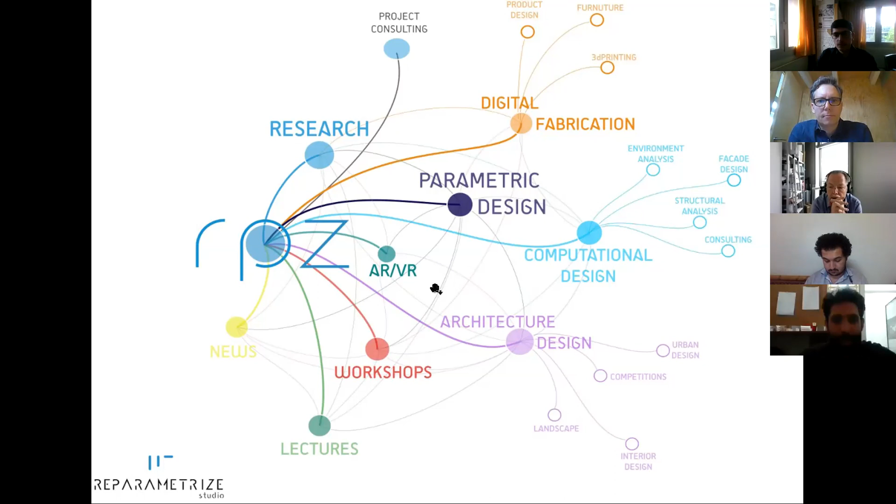One of the highlights of 2019 was, of course, the Eyes of the City Shenzhen Biennale, invited by Carlo Ratti Associati, which showcased 2 years' worth of research and development on the post-war smart city redevelopment of Damascus, Syria. We brought the past, present, and future of this city right in front of our Chinese audience through sophisticated 360-degree projection mapping. Our core competence lies in the field of artificial intelligence and smart city.

Recently featured in ArchDaily, we are one of the first companies to apply 3D scanning and AI-driven data analytic methodology for post-war smart city redevelopment of Damascus, Syria. Our vision goes beyond the redevelopment of the city of Damascus, and we are looking to be the next leader in post-disaster urban development, offering a proprietary state-of-the-art technological solution for a smarter and more connected city.

So again, Echo of Children is a joint research and summer online course. The research aims to teach thinking strategy for dealing with the post-war phase by focusing on children and developing building materials from destruction using digital design techniques.

Find the link between the effect on children's behavior and remaining resources, in order to develop and exchange experience information to reach an interactive, productive outcome.

The course had 5 phases. Phase 1 was the research phase, data collection. Phase 2 was material system and project development, then location and strategy, design processes, and finally the fabrication processes.

We invited a lot of guest lecturers on different topics, each linking to the research phase we had. In the end, we had Patrick Schumacher as the final guest, talking about the role of parametricism. Most of you were there in the lecture.

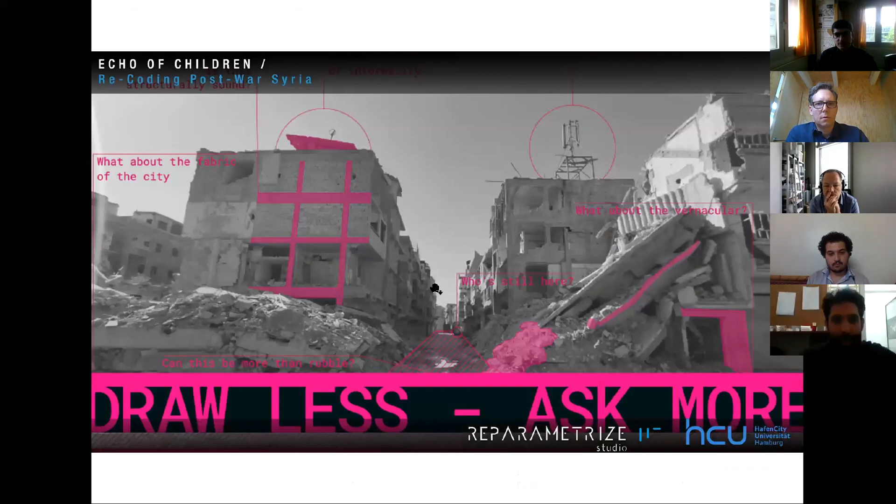In this course, we focused on rethinking the methodology of temporary architectural practice in the environment, aiming to find connections between war-affected behavior of children, remaining resources, and temporary projects, in order to form a pilot project as a one-to-one prototype, developing student knowledge about reusing materials as an essential means for change in the affected area, through developed samples of recycled material produced from war waste rubble.

The course is an integrated work program from gathering information, researching and studying, to manufacturing and creating new material out of rubble, developing a new methodology of recycling war material, and implementing this new material in the process of rehabilitation and the fabrication of new prototypes.

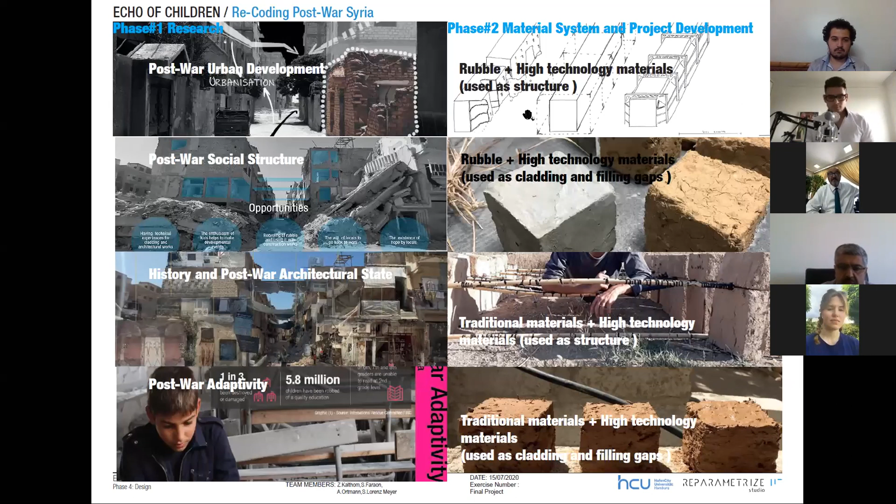So now we reach the design phase. We chose a location which is very important, in an area in suburban Damascus called the Zabadani Valley. It's a popular area in Syria where a lot of families used to have their vacations, a popular place to go.

We also chose the site, called Zabadani Festival Land. It was before the war, and we will let you know how it was before. This is a quick review of Zabadani.

It's part of a region containing many villages in Syria. The weather is Mediterranean, with rainfall in very good percentages in the winter, and it's located in a south basin, which makes it a kind of cold area.

This is a field study about our location, since this land is located in the central part of Al-Zabadani. Before the war, it was specified for festivals, parties, concerts, temporary exhibitions, and centers. The site contains many activities, which is now in a very bad condition, as you can see in the pictures we took during our field study.

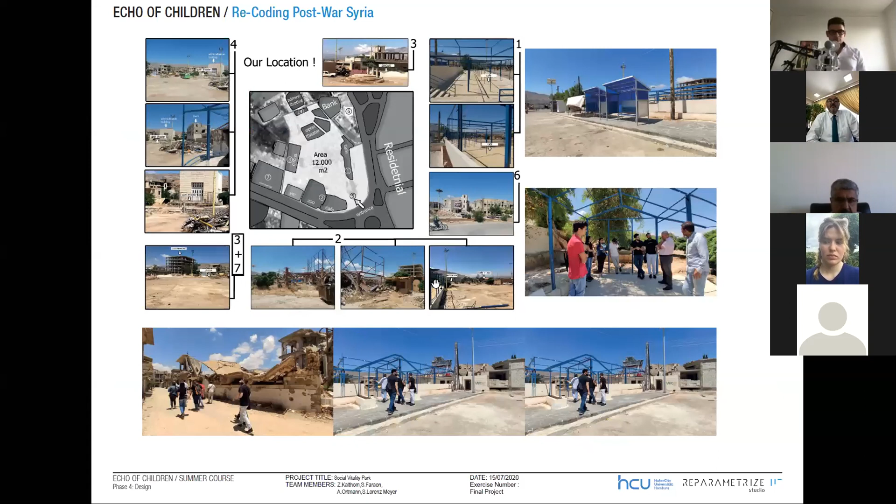The area of the land is 12,000 square meters, located from the main street to Damascus, with a main sub-street here too. Before the war, it had many activities such as an open-air theater, a festival place which is now empty, an amenities place, and a market and cafe built recently by the UN but destroyed during the war. The surrounding area is residential, with a government building, a bank, and a commercial area nearby; the rest is residential.

Some basic sun and wind analysis for the land. Based on this study, we found 4 ways of thinking, but within one system to serve this area. We want to give a new product for the residents, placing them in a good modular grid so we can take the most of the sun and wind. So we chose a 45-degree grid.

Each group now will explain about their own idea of prototyping, but this is how we are seeing our prototypes on the site, and this is how we make our main entrances.

Since here we have this structure that I talked about, which is in a bad condition, but it's also the way of entrance from the main street, so we make it as a main access for us, and also the main entrance we just keep it as it is.

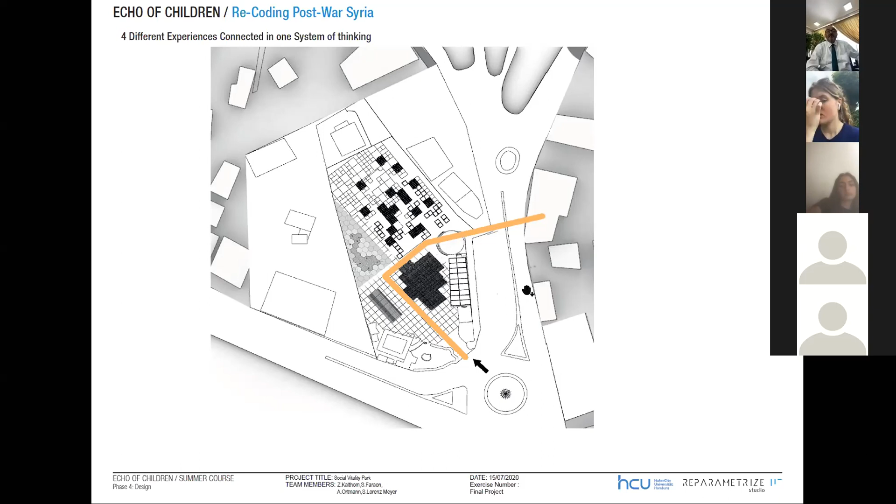We have 4 different prototypes, 4 different ways of thinking, but unified in one system, which is giving a new experience for the inhabitants of this area, and make them invest and socialize and play, and give them new functions. Each group will explain about it separately.

So we have our project, which is Social Vitality Park. We have the Inside Out project, we have the processual scaffolding system, and we have the concrete system. These are the visual connections between them.

Starting with our social vitality park, our approach, we will be taking this area, since we are focusing on social interaction, and also workshops for women and children, and also places for a farming approach, since this area was also famous for farming vegetables and fruit.

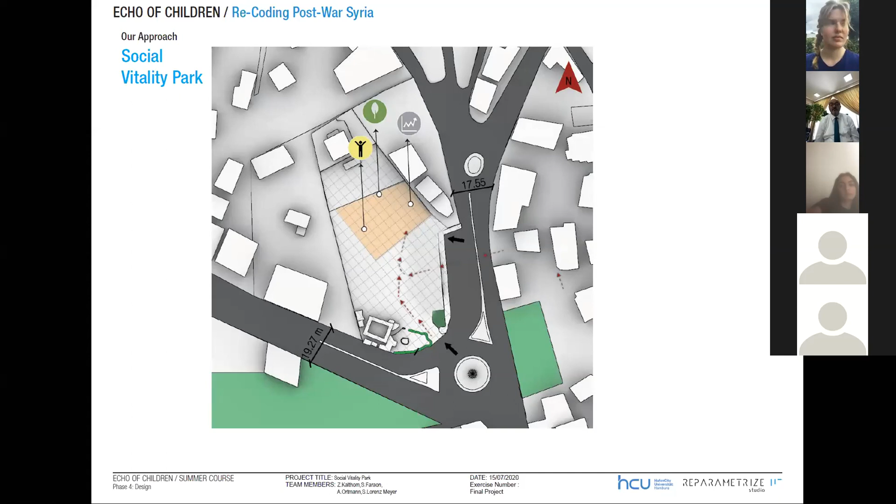Okay, so we'll just go with you a little bit about our research about the social structure in a post-war in general, and then we will go to specifying our project. So Zaina, please go ahead with this one.

Zaina, is she here? Yes, I'm here. Okay.

Our vision was reimagining the destructed building as solid endpoints, and generating new ideas and functions to fill them regarding material usage, and empower the awareness of responsibility. We wanted to focus on the creation of common areas for people to get together and use local material, respecting the cultural identity through the continuity of local and traditional solutions.

For the social aspect, post-war community, we started by studying the Syrian family structure post-war. What happened was that women are now the decision makers in almost 1 in 3 households, and the children are displaced from their school. That's why we found that we need to help people help themselves, especially women, and combine the effort, because combined effort leads to better results.

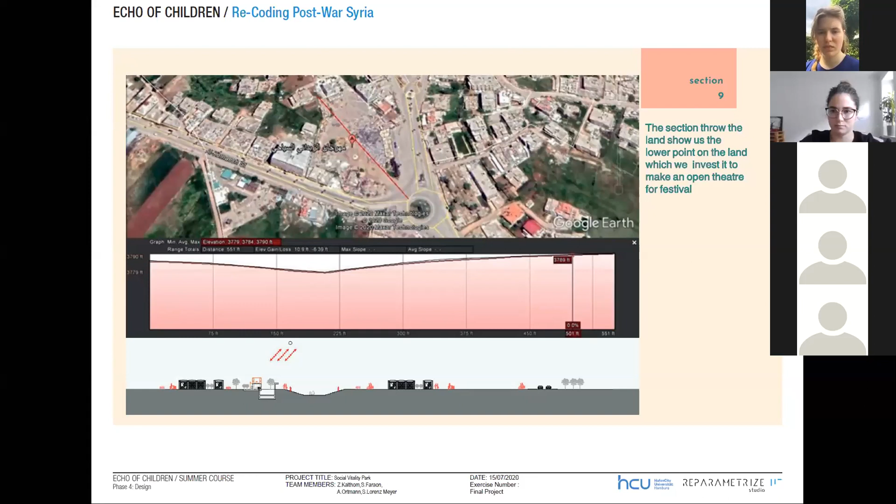Okay, so we will be now moving to the next explanation of our experiments on the material. We studied materials made out of rubble. We went to a destructed place in Damascus and collected the rubble, added cement, and also added different sizes of rubble. And we added a new high quality material, perlite, which also provides thermal insulation and gives new alternatives for the material we are developing.

So we went through many experiments, and Sophie and Annie in Germany tried to make their bricks, but without the perlite. Here we are trying it with the perlite.

So now, explaining the structural approach of it all.

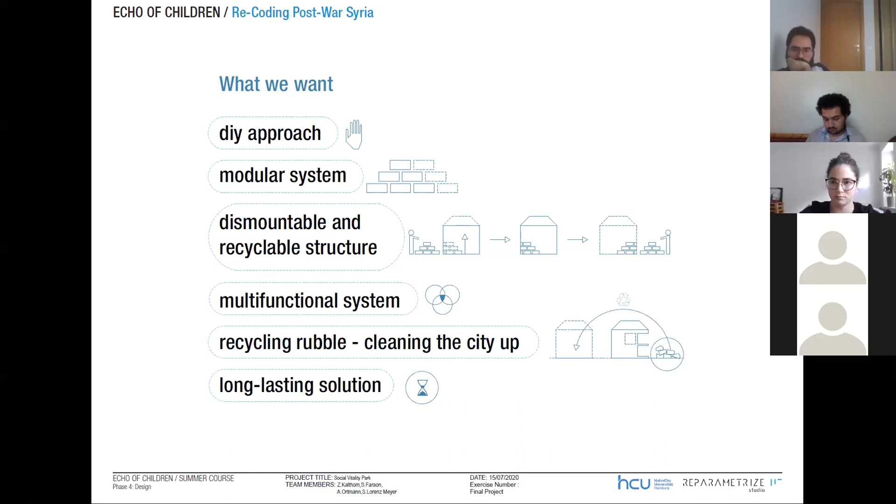So what we came up with: first we developed a system that would mostly work on buildings that were still partially there, where there were still floors we could attach new columns to. Later we further developed our system so that it could also be built into completely new structures.

Our system consists of interlocking bricks, as you can see here at the top, we have some further 3D images later. They're made of rubble, as Anna said, and also cement, so they don't need to be burned, and perlite, which we mostly use as insulation within the bricks.

It might sound strange for someone from Germany that we plan a building without a proper insulation layer, but in Syria it's actually pretty common. Later, insulation could be added either on the inside or the outside of the structure, so there's room for that.

Our bricks are not just interlocking, but also get pre-stressed with steel rods that are tied through them at all four corners with nuts. These columns are set up on a 4x4 grid, which we'll get into more later. Within this grid, there are fields created in the middle, and these fields can then be filled with different types of facades.

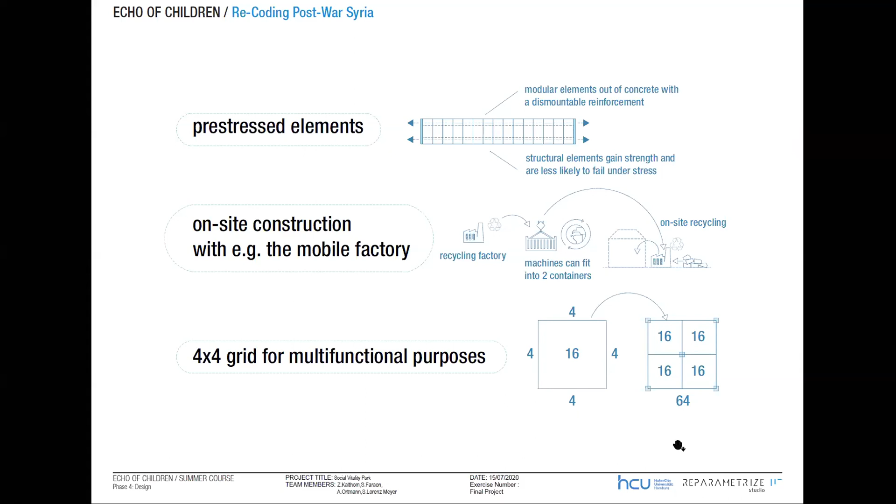We had the idea from a company called the Mobile Factory, which had the same idea. They put the machinery of their recycling factory into two shipping containers, so they can be shipped around the world and used on site. It's a Dutch company, and they used it for destroyed homes in Haiti. We thought we could use the same approach, where you get the factory right to Syria and do the on-site recycling process.

The 4x4 grid we came up with creates a room of 16 square meters, which could be used as a good room for sleeping or meeting. Even combining 4 of these 16 square meter units, you can use it as a good common room with just one column in the middle. So that's just the general approach.

As we see here, we made a little section with columns on each side, and then the facade element, which can have great variety. We thought of either a completely closed facade, or putting windows in, or maybe small gaps. Above the columns we have the beams on the left and right, and then a vaulted roof, which we'll see more of on the next page. Below the vaulted roof, there's a little gap created there.

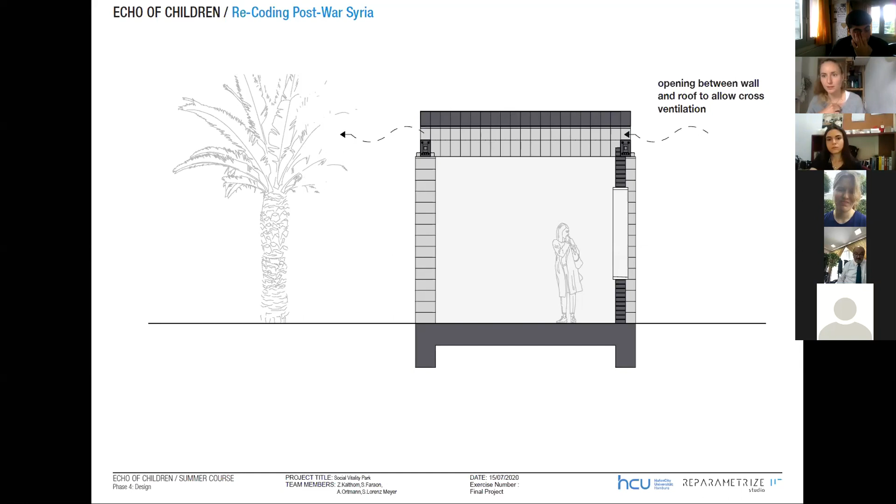The basis of our whole structure are these bricks I talked about earlier. The interlocking bricks are 40 by 40 by 20 centimeters, with an interlocking part in the middle and also a hole, which makes them not quite as heavy. They interlock better, and for structural purposes it's good if the weight is on the outside and not so much on the inside. There's nothing we need in there, so we thought it'd be good to leave it hollow. Then you see the four steel rods, which are pre-stressed and work as a connection.

These bricks are made into columns, as we see on the bottom. On top, we have concrete plates which we use to hold the beams in place. The beams are also made from interlocking bricks and also pre-stressed. On top of the first layer of beams, we need a second layer of beams.

On top of that, there's a vaulted ceiling. The ceiling also consists of very small pods, because we wanted not just the columns and beams to be dismountable and light and easy to handle without requiring big machinery, but we wanted the same thing for the ceiling as well. That's why we have very small little roof pods.

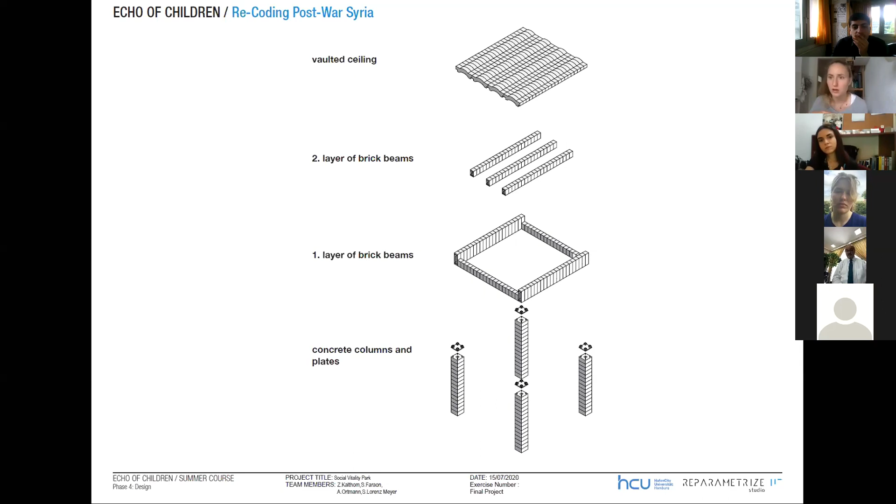We stuck to only one story. Potentially a second could be added, but we weren't able to do a lot of testing, so we decided it would be better to stick to a one-story building. Then these 4x4 structures are created, which can be put together to create larger structures, not just in a square but also various shapes.

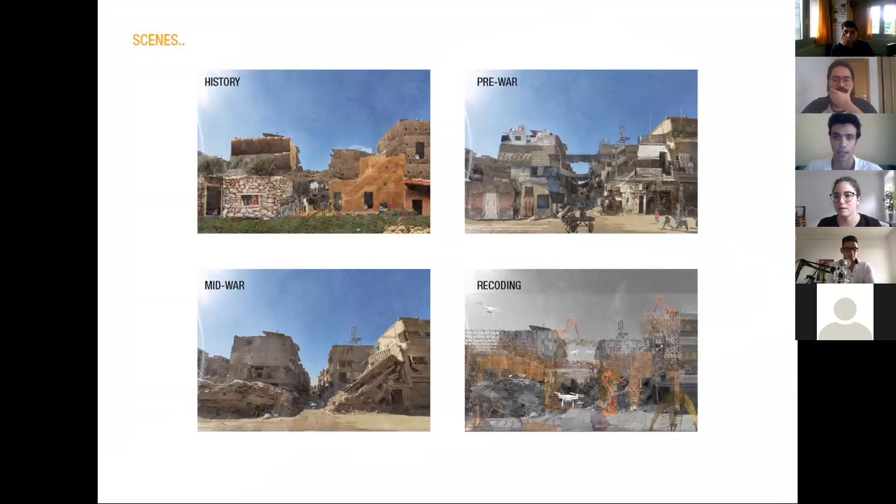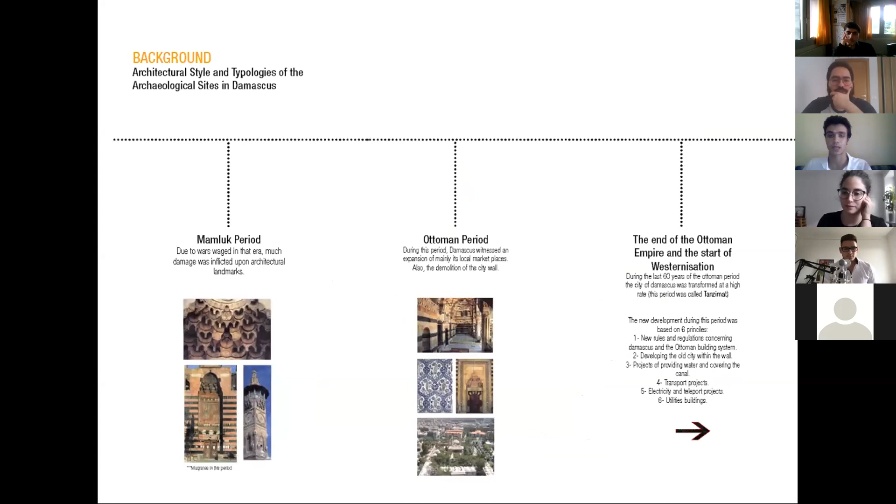So at the beginning, as we all know, Damascus is an old inhabited city. To do this, we've done research under two folds. The first fold is the history of Damascus itself, and the other was the history and timeline of Syria, passing through so many periods, according to the lectures that we've received on the history of Syria in this field by Dr. Mufaq Zghama.

At the end, because of the need for residential units in Damascus, our project aimed to cover the needs of residential units, as well as to cover any architectural space this community needs. So we studied the evolution of Syrian houses, starting from the tent, ending up to the modern villas we had in the 40s and 60s, which all morphed according to human needs. This project is supposed to morph to cover human needs as well.

With regard to the continuing precarious situation of Syria - in 2018, about 1.4 million returnees, and in 2019 another 250,000 could be recorded. Here one encounters extreme circumstances such as extensive destruction distributed throughout the country, as well as post-war conditions like lack of housing, infrastructure, and supply.

Based on research conducted by the UN, we have listed the most important elements for our analysis here. Firstly, the way in which the destruction is classified, and a tabular summary of the number of destroyed buildings in the significant areas of Syria.

The focus here is on Al-Zabadani, with the amount of 3,364 cases, where also the approach for the project takes place. Here is a detailed summary in the form of agglomerations and agglomeration points of the affected buildings in Al-Zabadani.

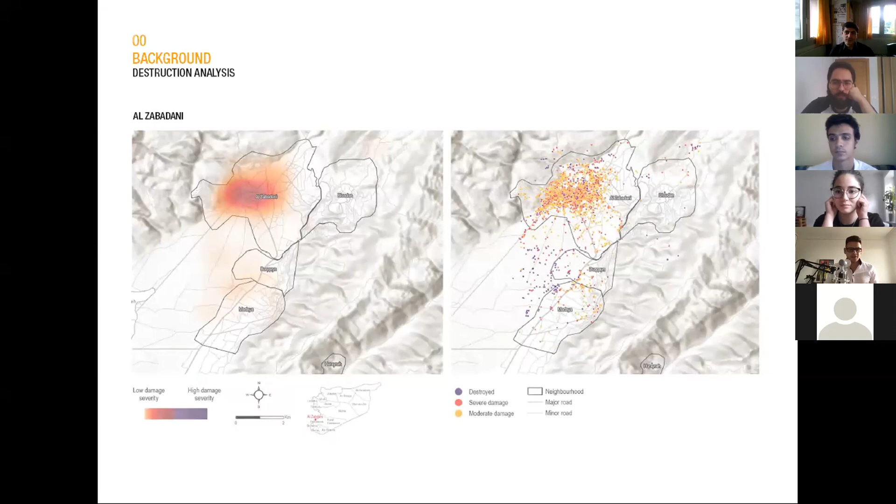For orientation, we used the UN classification of respective destruction. This heat map helped us understand and analyze the current situation of the site. More exactly, we have here the exact allocation of affected buildings in the rural region of Damascus, listed as destroyed, severe damage, and moderate damage.

Again, the focus on Al-Zabadani with 659 destroyed, 1,251 severely damaged, and 1,454 moderately damaged buildings. Now for the research context, we studied the conventional construction system that begins with picking the raw material and bringing it to the factory.

The material is then transported to the construction area. But our proposal is simpler: we only need to transport the raw material to the construction area and assemble it in the same place. To achieve this vision, we need to know what, why, how, and when.

The raw material we chose is the reed, also called Arundo donax in Latin. This material is a medium-sized bamboo with thin-walled columns up to 9 meters high with long internodes. The origin of this reed is native to the Old World, from the Iberian Peninsula, used for medicine, horticultural, and cultural purposes. Reed grows abundantly in rivers, lakes, and humid places.

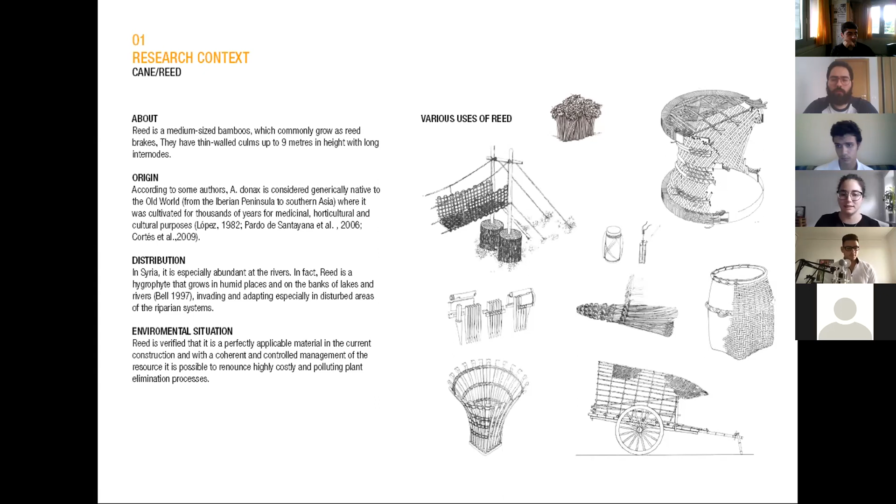This material is very popular in Syria and all around, familiar to the population. It actually gives them an identity, and is used for crafts and furniture, and now for construction.

This material has a good environmental impact. The reed usually grows quickly and does not need special care to be produced. It also helps prevent soil erosion and reduces temperatures in the area. Reed is a great construction material for structures, especially in seismic areas.

Using this material will help minimize the use of natural resources such as water and wood and some others. The economic impact of reed can give us a chance to create a local industry that benefits the communities directly.

The reed, due to its growth method, is a cheap material accessible to the public. The tools we need are not expensive and can be found everywhere.

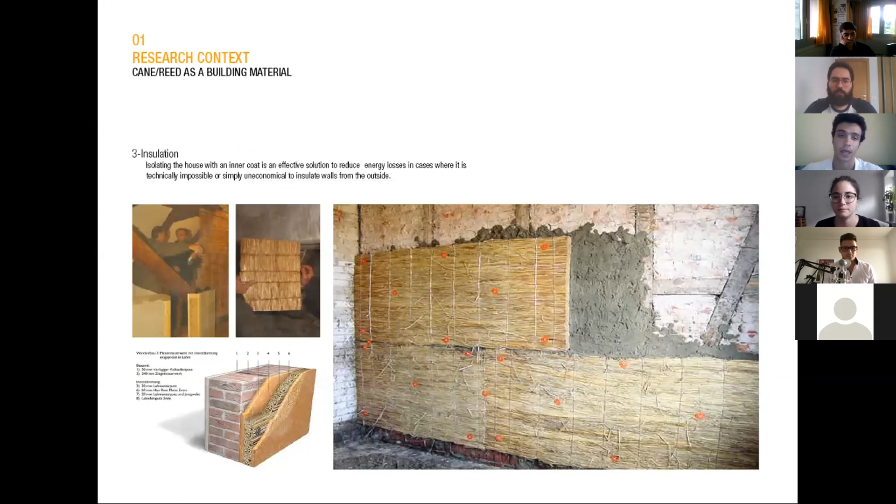Reed has many architectural uses. Here you can see it as a cover top, and in the next slide as a facade scheme. You can also see it used for isolation, because it has good insulation abilities.

On the other side, you can see it used as a building unit with other materials such as earth. In similar cultures, like in Iraq, we used to see cane-built communities in the marshes, houses and other things built out of cane.

Our approach, because of the ecology of children, is that this project aims to turn this building into an aggregation system. This system will be imagined by children as a Lego game. We will work on connecting children to their environment, to their upcoming city, and to their building process, so they can see their building as a game.

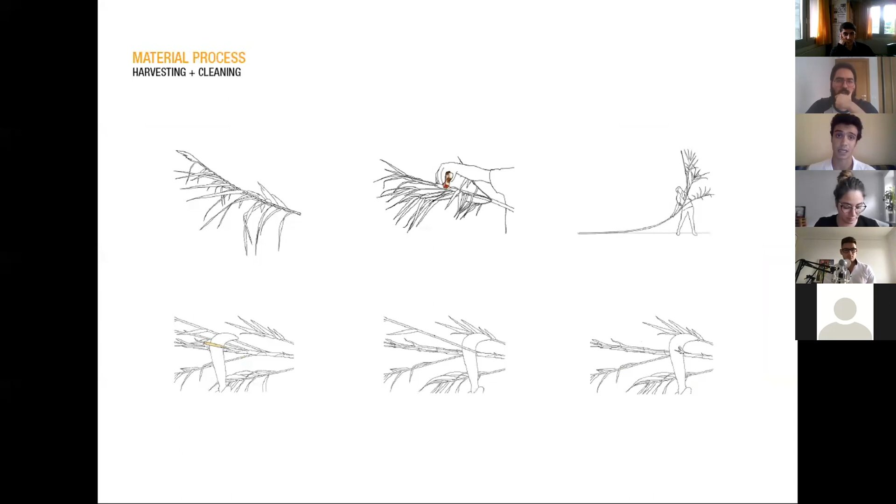The material process begins with using 2 to 3 meter cane. We start by harvesting it and cleaning it from its skin so we can build with it. Then we let it gain firmness for 24 hours, then cut it into 45 centimeters after classification. The classification is done based on diameter, length, and workability.

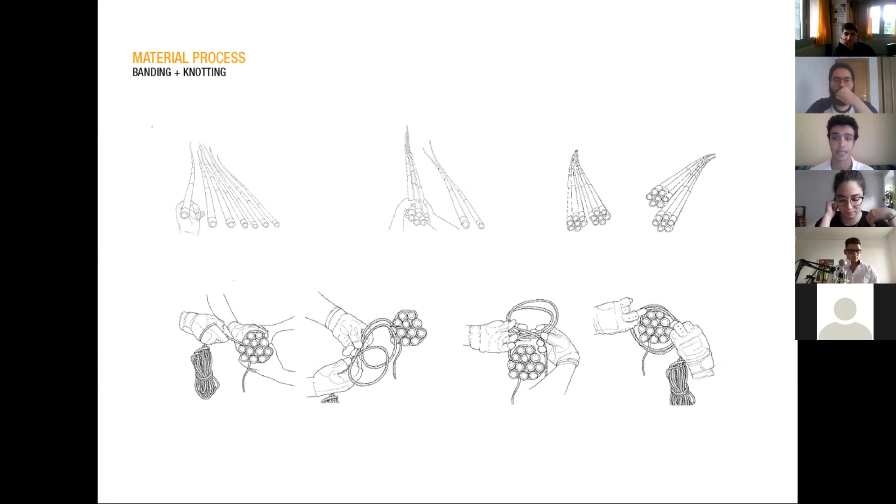Banding and knotting: after cutting it into 45 centimeters, we band 9 canes together using several techniques, which we will see in the next slides.

For the component design, as Abed mentioned, we have 9 reed elements collected together to make a building block. This building block is represented in our presentation as a cuboid, because the processing power of my computer couldn't handle more detail. This cuboid references the building block, showing the dimensions, connection points, and connection direction.

So first we explored 3 different processes for the joinery. The first method is we used the rope. In this first method, there are also 3 ways to use the rope.

The clove hitch, as we see here, we put 2 different building blocks on top of each other, perpendicular to each other, and we use the clove hitch to attach them together. Then we use the diagonal lashing, which is the same as before, but used in a diagonal axis. Then the shear lashing, we put 2 building blocks together and connect them in this way.

It's important to note that these connections also work to resist structural loads. So for instance, the last one is shear lashing, so from its name, it resists the shears of the structural loads.

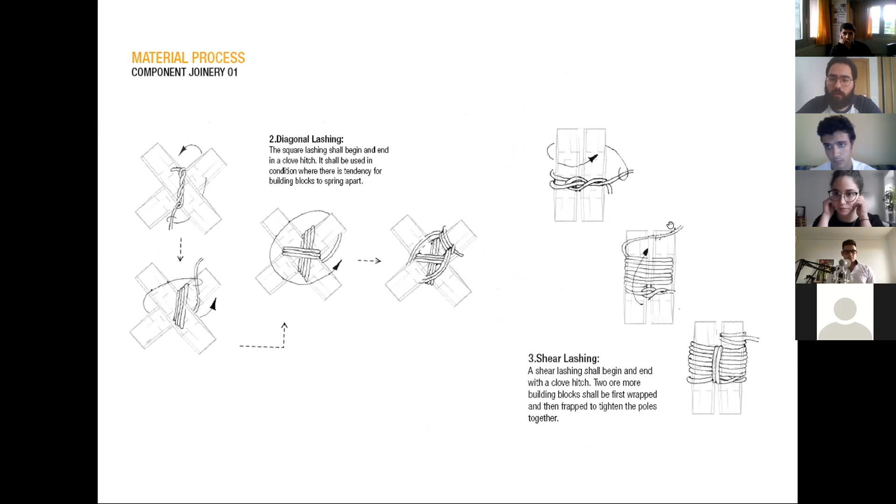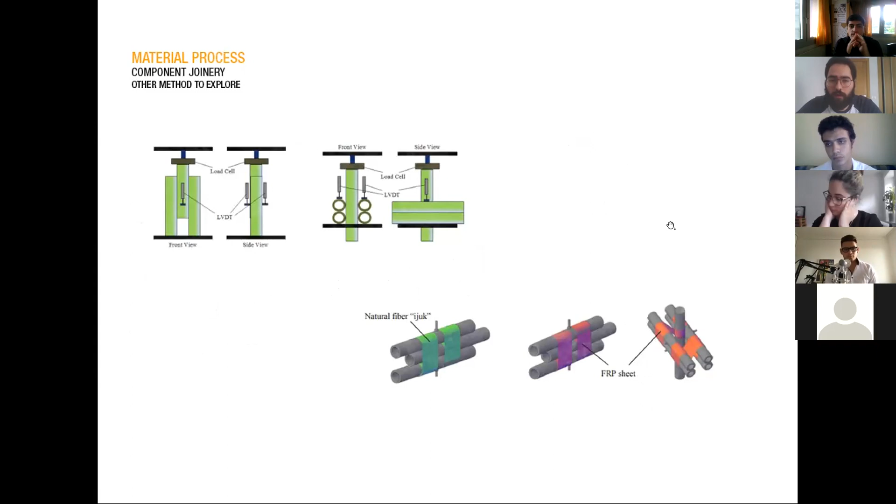For the material cost estimation, we look at the reed and the joints. We can get the reed in 2 different ways. The first is self-harvesting, which costs only labor, 4,500 Syrian pounds per labor, and each labor collects approximately 200 reeds, plus shipping because it requires a car.

For the joints, we have two different joinery systems that we studied. The first is the ropes, which cost 400 Syrian pounds per meter. Each block needs around 4 meters of rope, and labor fees will be 5,000 Syrian pounds. Each block takes approximately 4 minutes.

The other option is bolts. Each 20 centimeter bolt is around 170 Syrian pounds, and each block needs five bolts to build.

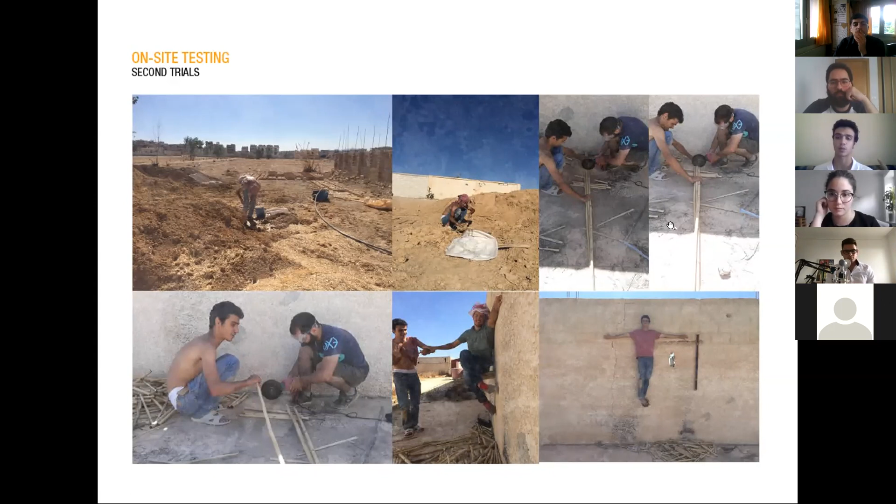So we tried using empty canes in our approach, and we made our own building block to see if it would change the result, and it actually worked. We did a few old-fashioned tests and it worked as well. You can see me standing on a building block by myself while it was cantilevering from the wall. Here is an aggregation of 3 building blocks together by ropes, and I was standing on it, and it worked so well.

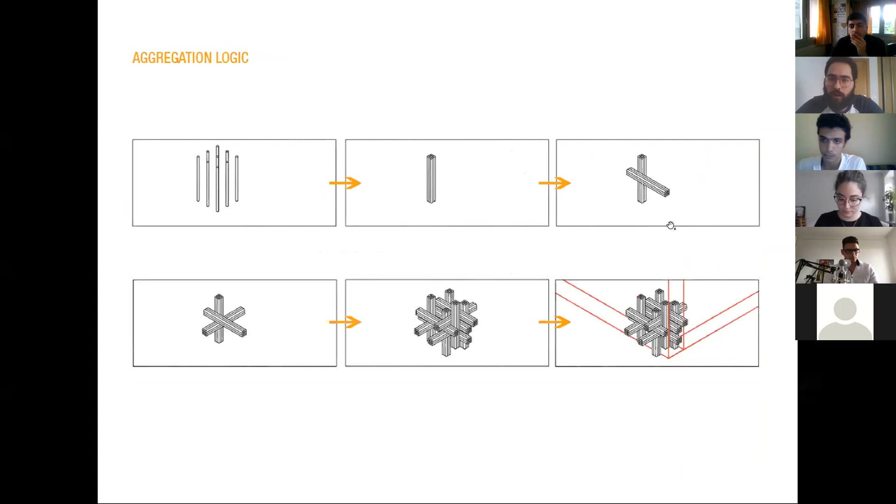The production process would have 3 initial plates. The first plate would be to collect the reed elements, the second for pre-assembly. We studied human collaboration: the human would come and put the reed elements on the first plate, and the second plate to connect the reed elements together to form a building block. The third plate does the layering of the reed elements to finally move it to the foundation.

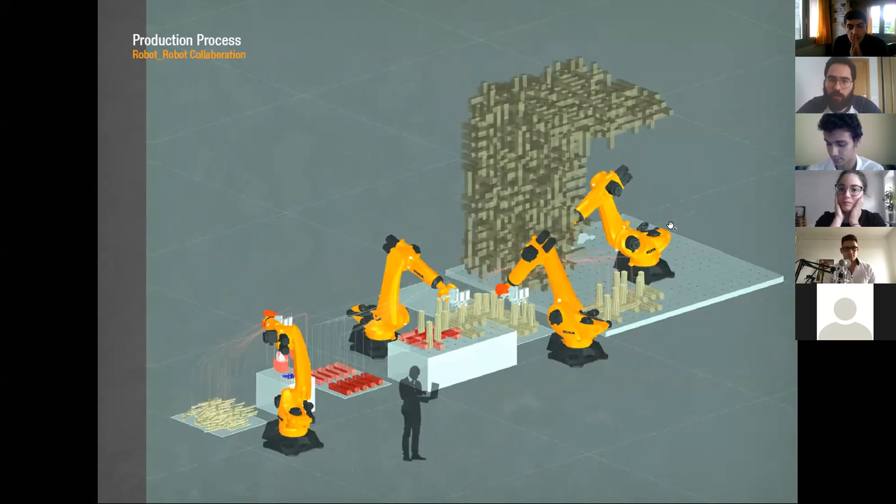Here is another production process: human-robot collaboration. The same production process as before, but with less human involvement, introducing 2 robotic arms to do the production, making it faster. This may be in the distant future, but robot-robot collaboration with only 1 human controlling the robots follows the same process, but it will be much faster, I think.

So for the robot, we developed a pick and place method. First we scan, then we use generative design using evolutionary algorithms to automate robotic pick angle. Here we see different iterations of how the robot is seeing the building block. After the robot locates the building block, it picks it and puts it in place. Then comes the human to make the connections with each of the building blocks.

With the development of the innovative prototype, which in principle is not only an area-wide repair measure, but also much more a contributory measure in the supporting structure, we have set ourselves the goal of giving the prototype not only one characteristic side. On the one hand, this construction measure is intended to repair any damage, such as small irrelevant openings, up to structurally important points.

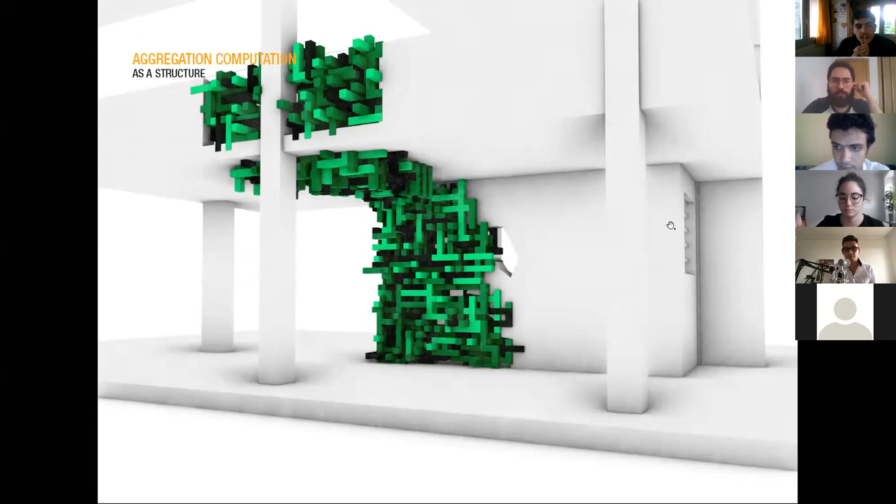On the other hand, it is intended that it is possible to build pavilions and other buildings from the pure prototype. Next, here now to our prototype, starting with the foundation.

We have decided to use a screw foundation. This way, we basically leave no significant carbon dioxide footprint. Furthermore, we significantly reduce the cost compared to using a conventional concrete foundation. In addition, we also save time in production and construction of the foundation, and thus the whole construction itself.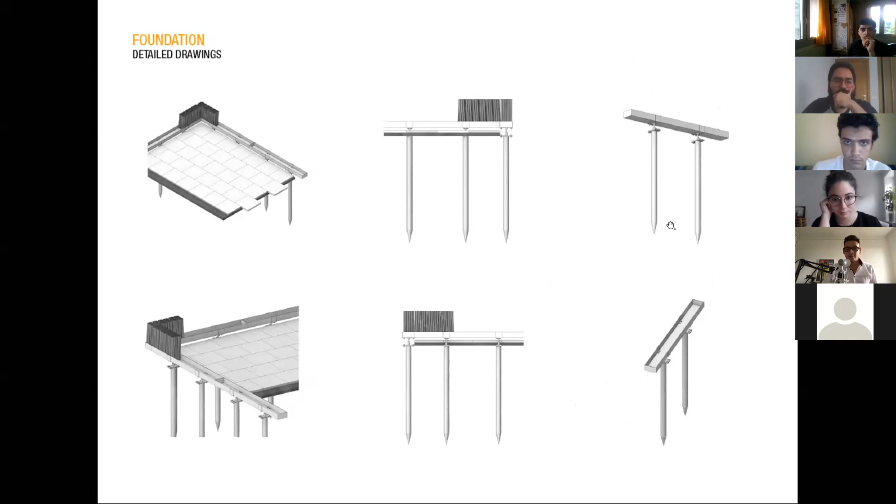The consideration is to use a screw foundation and then the locking of a column base. The main idea is also to use an elongated box with a length of 2 meters, each supported by 2 screw foundations, in which the canes find support, and thus the transfer of forces takes place via a hinge point. This support foot is designed as a screwable element so that any unevenness is taken into account.

On the visualization, you can see how the foundation looks like in section. Of course, the difference in height between the upper edge of the ground and the lower edge of the column foot is included in the design process.

We have decided to pour a 5 centimeter high layer of gravel sand and to store prefabricated UHPC panels on top of it. This ensures a solid and clean ground surface and can also absorb any load for the people working there.

We have also developed an approach for the roofing and its design. A double level is provided here for the construction of the roof. In detail, the construction looks as follows.

A supporting level comes first, here the column, and connects with the roof substructure above it. Then a planar surface is laid out, a water-bearing layer to drain off any rainfall and thus act as weather protection. The final layer is a system made of the same material and algorithm.

This intercepts the larger dimension and acts as the first filter. The layer below finally drains off the remaining passing water. In the best case, a kind of ventilated roof determination can be constructed here as well. In this way, standing water could be avoided.

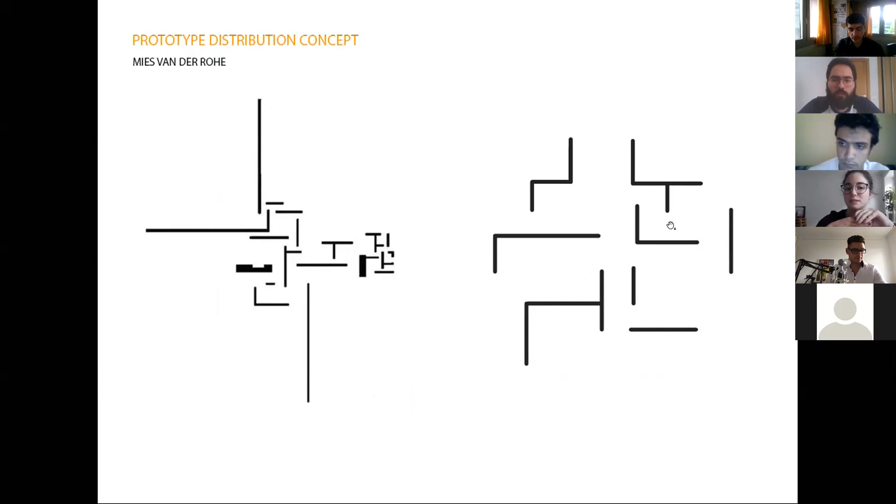The inspiration to create only elements on the site comes from the idea of Mies van der Rohe, characterized by the simplicity of the structural elements and the geometric composition, as well as the creation of spaces with particular qualities. The expansion was created based on a site analysis following the defined 4x4 grid.

For the expansion, different aspects were considered, such as the projection of the sun, the direction of the wind, as well as aspects such as economics and sustainability. Our project is sustainable since the prototype can be built, rebuilt, and reused in other places.

The roof is also following the grid, creating a covered area, but also giving us a chance to create open spaces if we need it. And to place the columns, we also followed the 4x4 grid to make the expansion unified and serve safety for all.

The prototype continues with 2 main entrances in both parts of the site, from the north and from the south. 5 different spaces were generated to cover the necessary activities, and analyzed to decide which activity will be implemented in each space.

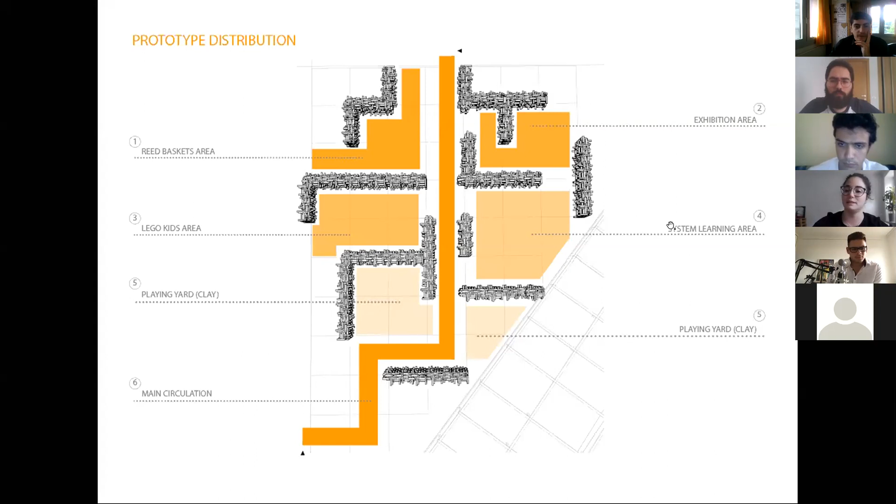So we decided first on the reed basket activity in the north patio. This activity also connects with the market there, since children can generate their basket and go buy things that they require at home. With this task, children can get familiar with the material we are working with.

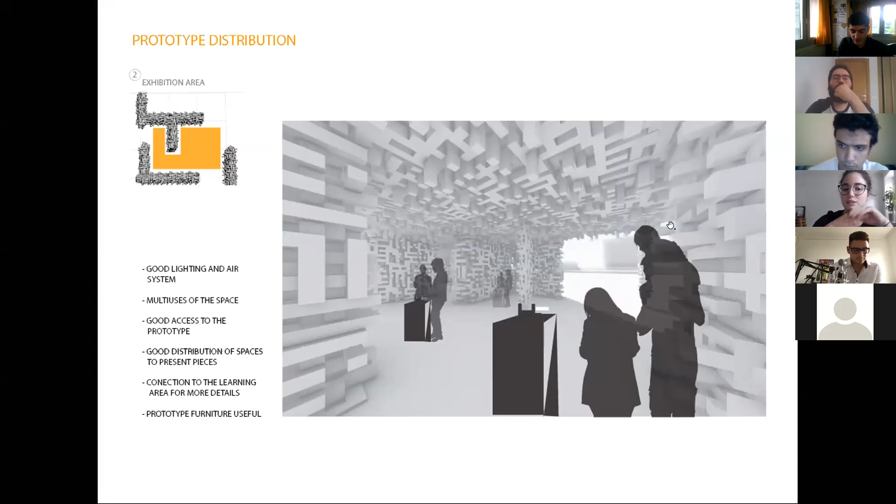So this is very important for us. The exhibition area is located in one of the main entrances and has access for all types of public, as well as having a direct connection to the learning area of the system for any question generated there. It also has an intermediary wall that distributes the space and can be used as a shelf.

We also have the Lego kids area. This space gives children the opportunity to experiment with similar figures that are suitable for learning our system. It is a much more closed space with the proposal to keep the children in the same area.

Number 4 is the STEM learning area. This area is one of the most spacious, with great capacity to put robots and furniture that is also created with our prototype. This area also has a direct connection with the structure already located on the site, where we can do some experiments.

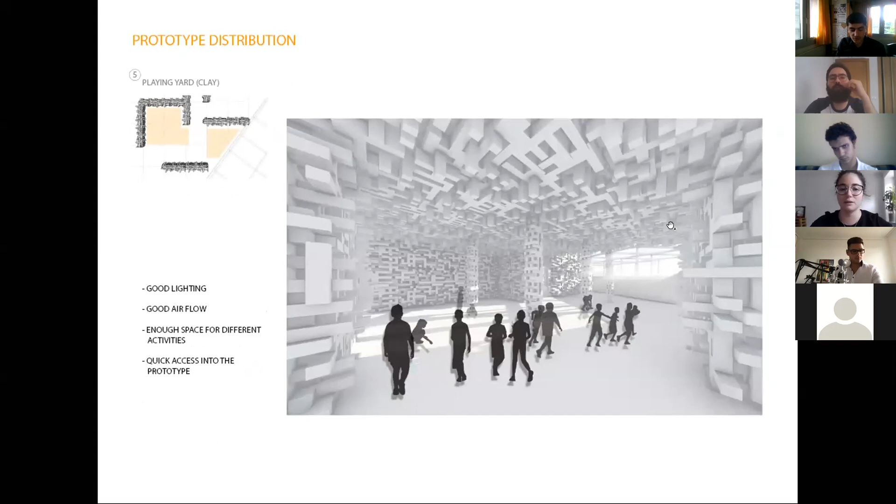Number 5 is the playing yard located on the south part of the prototype. This area is more open and available for all kids to play with the earth, and also to have picnics with the family, and to just enjoy and have quality time.

And this is our corridor that connects both sides of the prototype and allows us to get access to all the prototypes without any obstacles.

Okay, so finally, we explored aggregation computation variations in the wall. Here we see different variations of the wall. In the first line, we can see that if we want to not allow the sunlight to enter, we can use the first variation. And if we want the structure to have more porosity and more access to sunlight or wind, we can use a different variation.

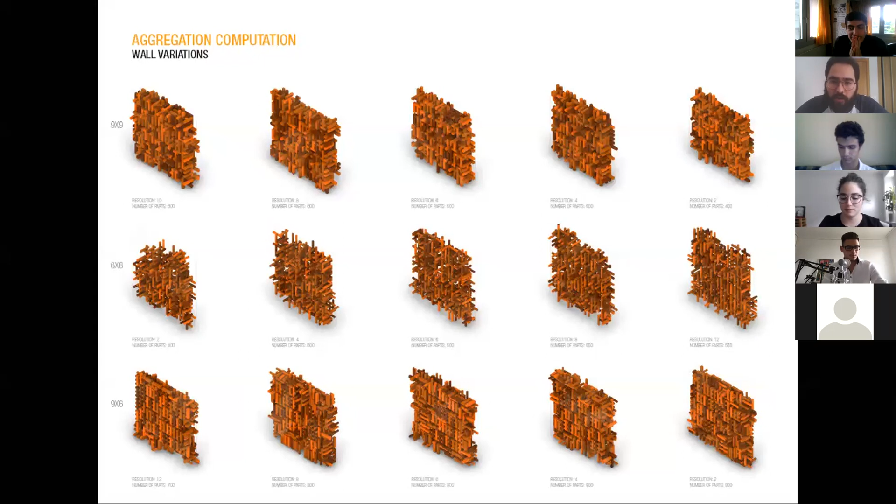So to sum up, this is only a first step in our research, and there is so much room for future development in the material joint aggregation, computational logic, fabrication, assembly, structure, and community involvement. Thank you.

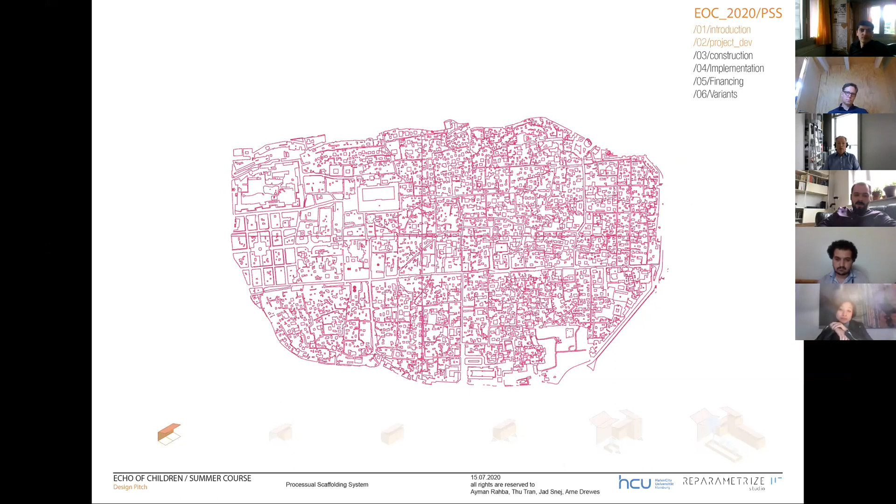So the first part of our presentation, now that the introduction is over, is how we came to the development of our project. We started in Damascus itself, and to give you some frame of reference, we made this picture to highlight the structure that Damascus evolved from. You can still see the original structure that has been filled by the locals, which was for us the first step to see how the locals actually work with what they have. What they had was the vestiges of an old city, and they worked with it and filled it according to their needs and their culture, which we took as a main factor and main parameter of our design.

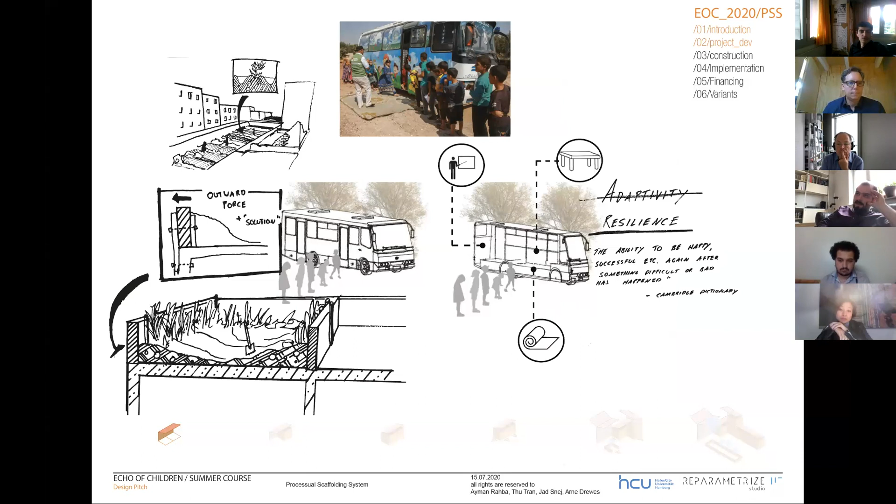So that was it for the lovely parts, and we went on to the not so lovely parts, which is obviously the war and how it affected the people. We set out to take the first thing we learned - people making do - and look at how people make do with what they have. The things we found were astonishing: farming in between demolished buildings, schools that got into buses, rooftop farming, and all sorts of things. We thought to ourselves that if we were to develop something, we would need to come up with something that people can work with and expand on - a platform for people to build whatever they need, and not come in as architects and tell them what they should need.

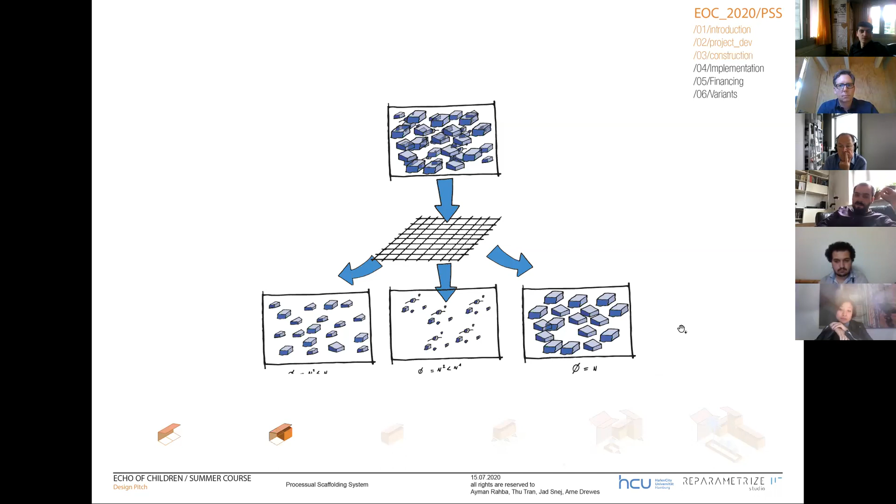From the stuff we had on site and the things we found, we looked at the buildings and derived possible building materials, picking out rubble as a material. We came up with an idea to homogenize the rubble diameters to create a viable building substance through sieving, a simple process that can be done manually.

We scripted spheres and cages to house these rubble blocks according to their size, forming building elements. These will later form walls and the foundations of our build. But since this material is highly unpredictable, we introduced another material, scaffolding, to have something highly controllable, cost efficient, and reusable for whatever uses we need.

Our concept is to promote the old advantage of the city with a simple, sustainable, and flexible building system. We leave the residents the freedom to develop the system further if necessary, or even dismantle it easily. We wanted as simple a connection as possible so everyone can build it easily. The residents should participate in construction to strengthen social cohesion and support motivation.

As you can see, the main connection is a scaffolding rotation coupling. It clamps two steel tubes together and can be anchored into any position - horizontal, vertical, or diagonal. Our foundation is made of a spindle foot, which compensates for different floor levels. These are fixed between rubbles in a gabion tube - the lower part filled with smaller granulate and the rest with bigger rubble to hold the horizontal load.

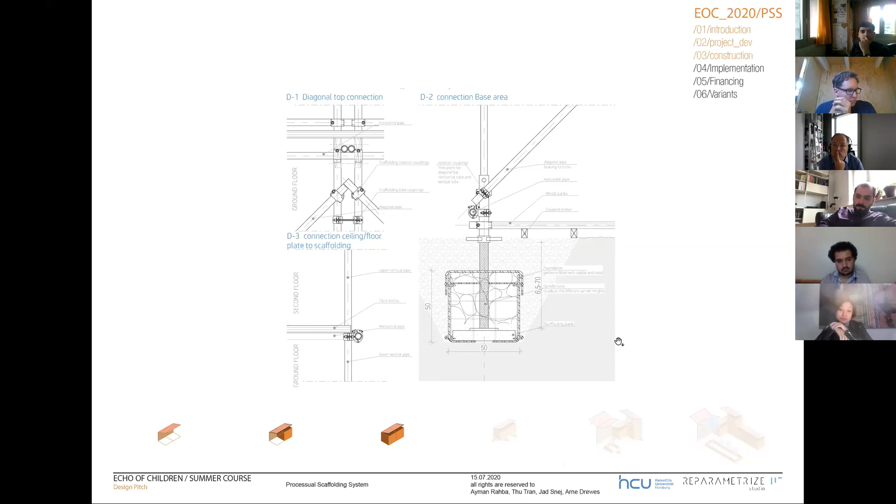To get to the first floor, a simple ladder is attached to the horizontal tube. To make climbing easier, a ladder support is attached to anchor the ladder.

You can see the floor construction. The underlying pipes are covered with wood to support the underbeams, so the floor construction in plate form is screwed on. We left the materials free here, as long as they have a board format - it depends which is easier to get in Syria.

We also have gabion walls which can be raised and are attached to the scaffolding. The whole system should not only work, it should also look attractive, so the walls can be planted. Bags of planting fleece are filled with earth and placed between the hollows of the rubble, then plants can climb up between the meshes.

For the roof construction, polycarbonate panels are simply screwed on with pipe clamps, as you can see in the picture underneath. If required, solar panels can also be installed with clamps and new profiles.

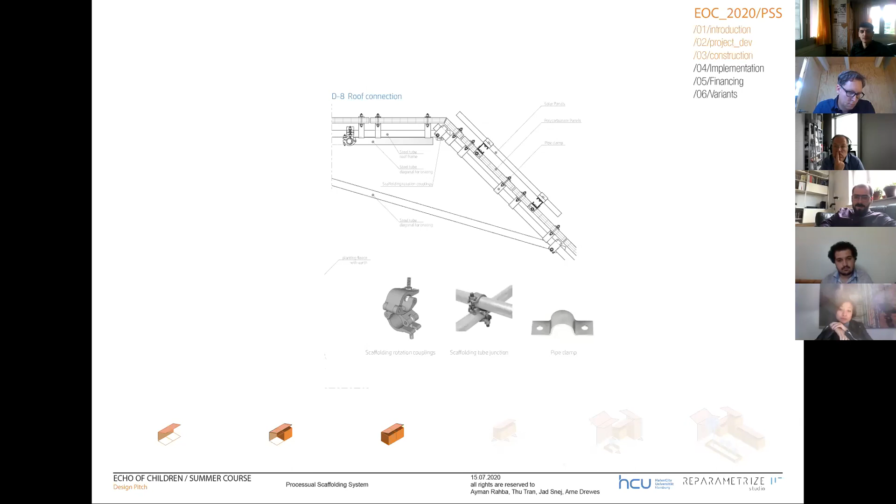Ayman will guide us through the production of one of these cells. This is the material we want to build one simple prototype with. We made instruction books and information so local people can build their unit themselves. We need a wooden box, gabion cages, walls, some scaffolding and solar panels if budget allows, canvas, and wooden boards.

We are working on the same grid, a 4x4 unit grid. So we have the foundation as gabion cages. Here is the scaffolding wall, the main or basic structure system.

Here we put some beams and bracing so we can work with vertical or horizontal loads.

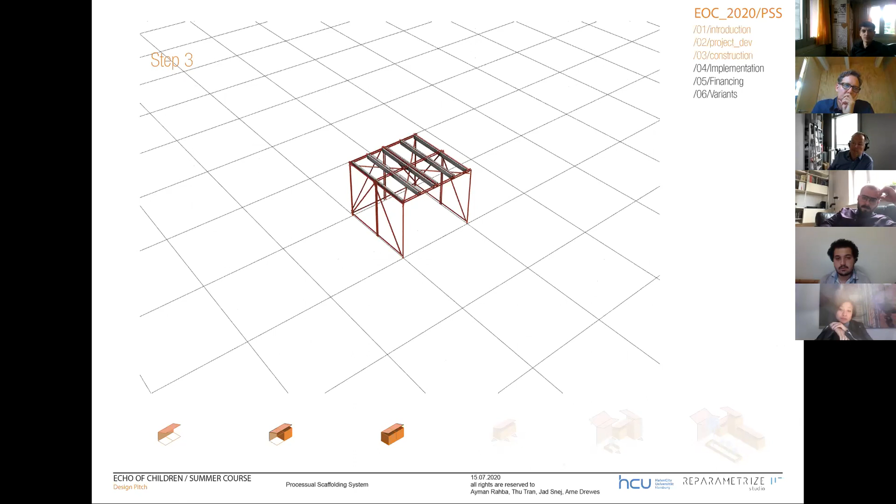This is the floor, a wooden floor. This is the whole structure system we need, and we add another floor so we have a storage area for the locals.

This is our final product. Here we can have a farming area in front of the prototype, a workshop area, and a store area where they can sell their products and foods, with gabion cages for walls, scaffolding structure, polycarbonate panels and transparent panels for the walls.

This is an exploded view for a single unit.

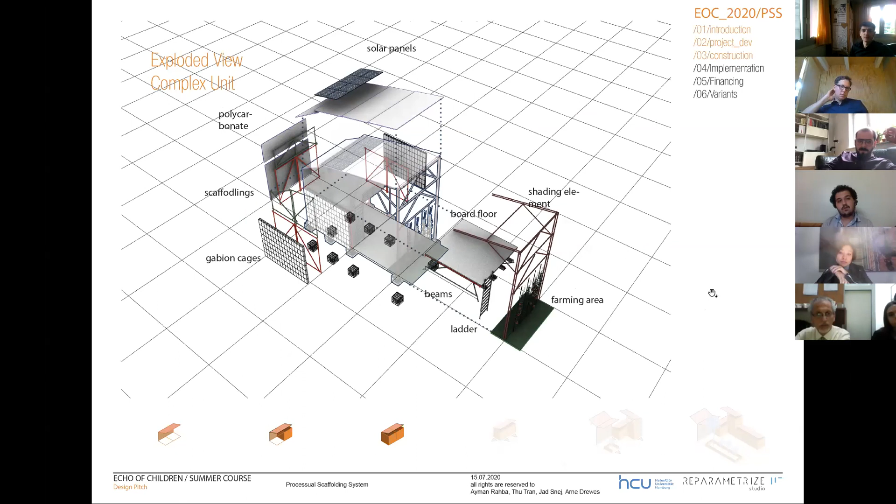Here are some more complex units. We add the connection parts, which also creates a shading area.

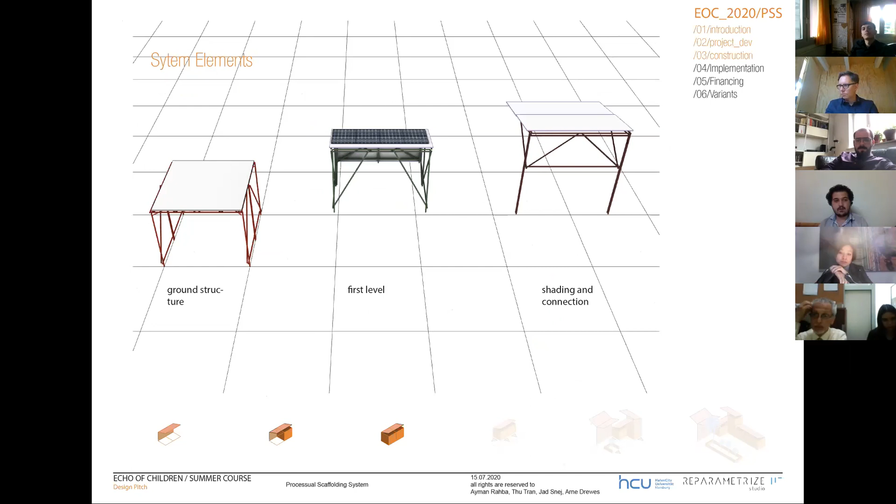This is the whole progression of building steps: first the foundation, then scaffolding, beams, and adding wood board for the floor, then the final product. These are our system elements, the parts we need to connect to each other to create our prototype.

Our idea was to create a function market, a kind of souk for the inhabitants. Since Zabadani are known for apple and fruit plantations, as you can see in the illustration, they can grow and sell within our common vision. On the ground floor is the sell function, and on the upper floor could be storage, generally a commercial function.

Our concept should only be a construction guideline for the locals, because they know their needs best. They will adapt their needed function into our system anyway.

Because the locals know what's best, we integrated this into our design process and thought about how to implement it. We have several steps, consisting of prototyping and design, which we are doing now. We're actually in phase 0, but phase 1 would be to build something and bring it to the ground, evaluating cost and splitting workloads between Al Jazeera University and HCU.

Our idea is to implement a step system to interlock the universities with the locals, to build something and guide them in building processes depending on what they need, because the scaffolding system itself is adaptable and reusable, so they can build whatever they want according to their needs. Ayman will quickly go over the site again.

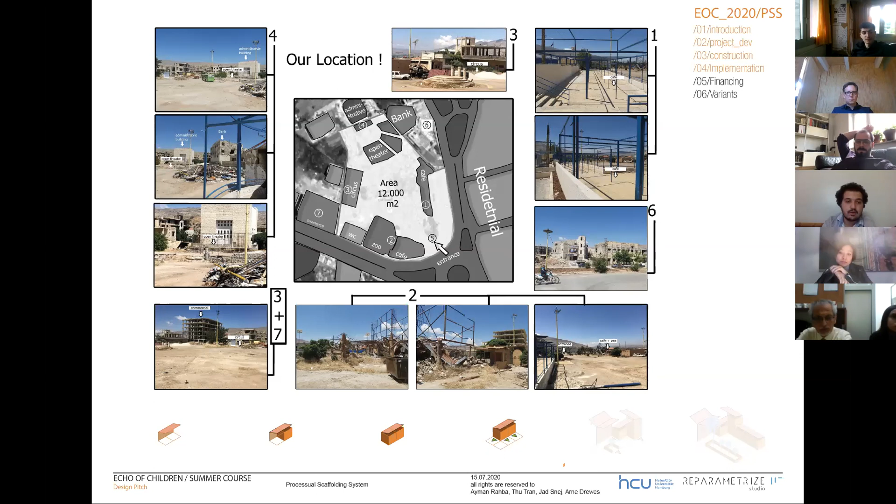With this site, we can do a procedural process of building in which we come in as architects and develop a cell that is maybe 1 by 4, 1 by 2, or 1 by 1, and develop from this point on.

But the bottleneck is the financing. So the first part should be a very small structure that we can work on with the locals in order to share our knowledge and teach them how to build. In later processes, these builds can expand and adapt to the needs.

The structures will be shown later, but there are viable options for different uses, according to the finance we calculated using international prices.

We have prepared a cost estimation for one module, one prototype. The individual length and amount of material are listed right here.

Most likely it will cost under 1,700, since we've assumed international costs and not Syrian prices, which are probably a bit cheaper. So we reckon it's going to be lower than 1,000 euros.

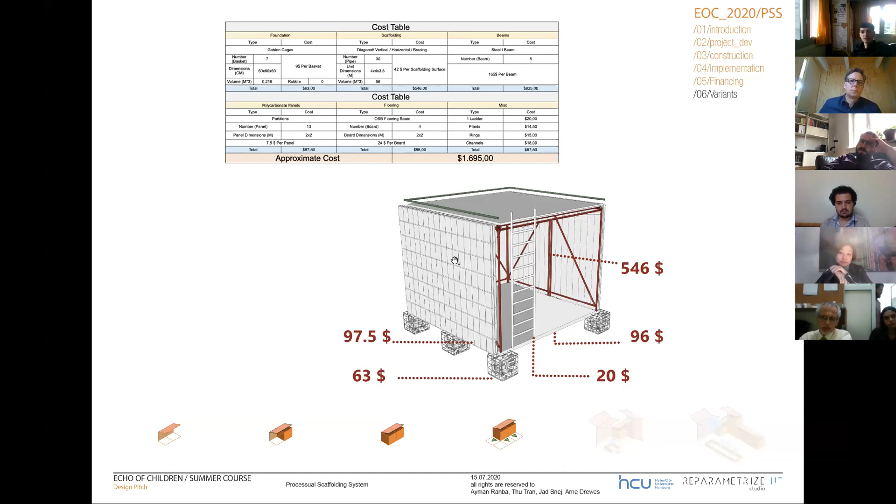Here's something which will work with the financing. Our idea is to split the process into two teams, a German team and a Syrian team. We have the advantage of maybe getting funding in Germany, which will bring us a long way in Syria. With simple steps, we can build a prototype in Hamburg and test it for loads and use.

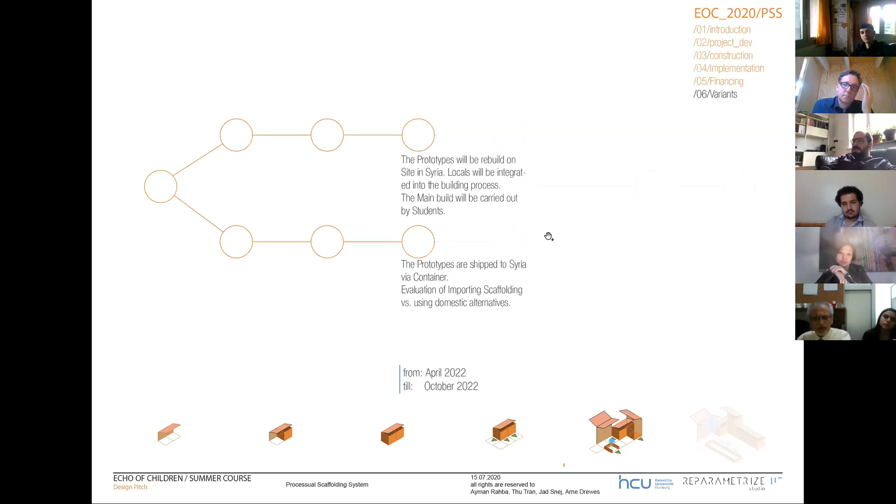We give a feedback loop to Syria to see if certain uses will work, or if certain weather situations induce problems. After the prototype is done, it can be shipped to Syria and built there, and feedback can be sent to Germany again to do additional testing.

In later stages, the locals will take over this process and only be guided by us. So we tell them, if you want a very spectacular roof, you need to build it this way, but first focus on the simple things.

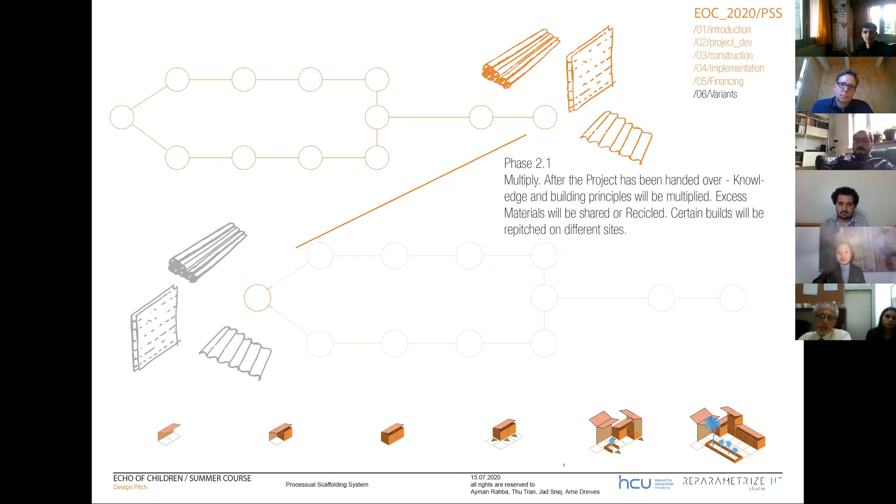The build scales with whatever the people need. The idea is that in the end you get something really big, and you feed your process back into a different system in which people can multiply what they've learned to build something similar in a different place. In the end, we will run through some possible structures we came up with using our system.

It also depends on the cost and budget. We have several proposals, like a simple unit or simple box.

Here, if we connect two parts together, we have something like a greenhouse, with some transparent panels on it.

This is a smaller one, depending on budget. If we only connect the second part of our proposal, like the second roof, together, we have something like a greenhouse.

This is our proposal for local shops, one store or workshop, with the second floor for storage.

This is our largest, larger proposal where we have something like traditional local shops and souks. And next one.

And this is if we add the connection part or the shading part to connect several parts together. So we have something like hangars where people can grow their food, their plants, and sell it in their place.

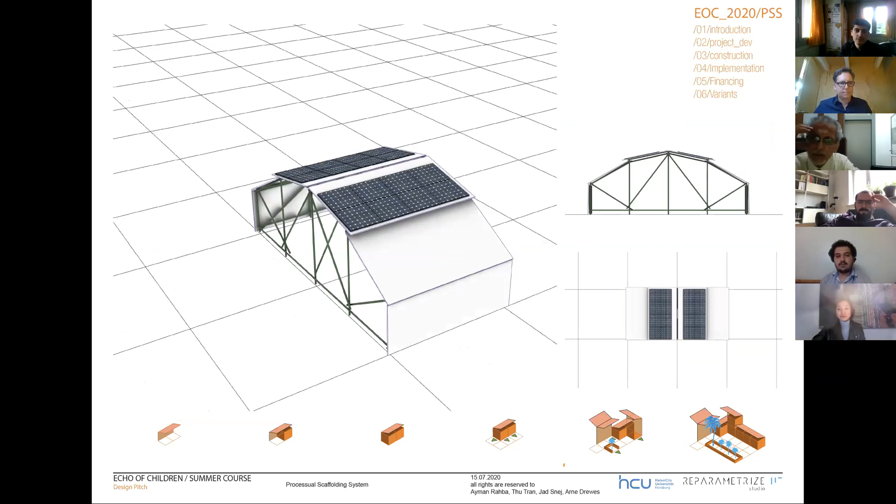Okay, for the function of the upper floor, I think it depends on the function of the whole project. Like if we have something for housing, the upper floor is something like another room for them. And if we have something like local shops or so, we have storage. So the upper floor function depends on the whole project's function. This is what I want to say.

Yeah. Can I add to that?

So we looked at the situation and what we can do as architects, and what we can build next year, because that is probably the time frame in which we thought this is needed. It's much more about being able to deploy something quickly to help, something better than a tent but as cheap as a tent and flexible, and getting the locals into the habit of building themselves, not coming in as an architect telling everyone what they should do, because they normally know best.

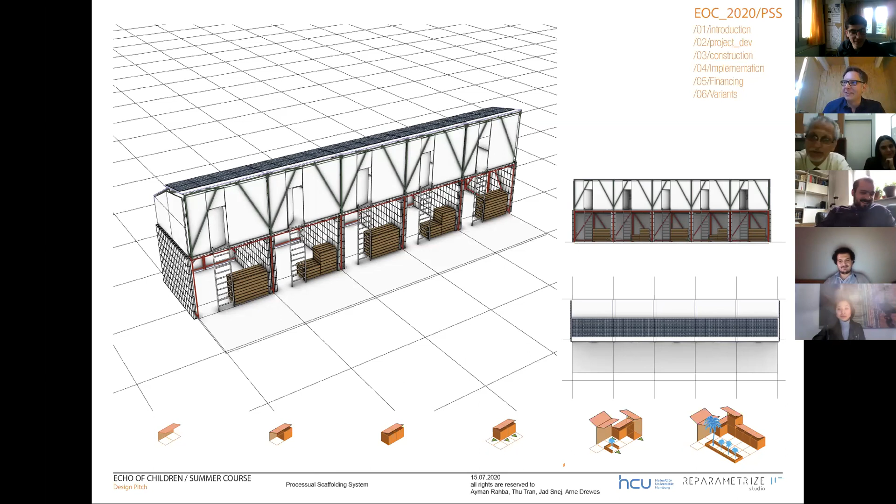Yeah, thank you very much. Good job. Thank you. We also want to build something here, you know. Yeah, definitely. Okay, very good. Thank you very much for your presentation.

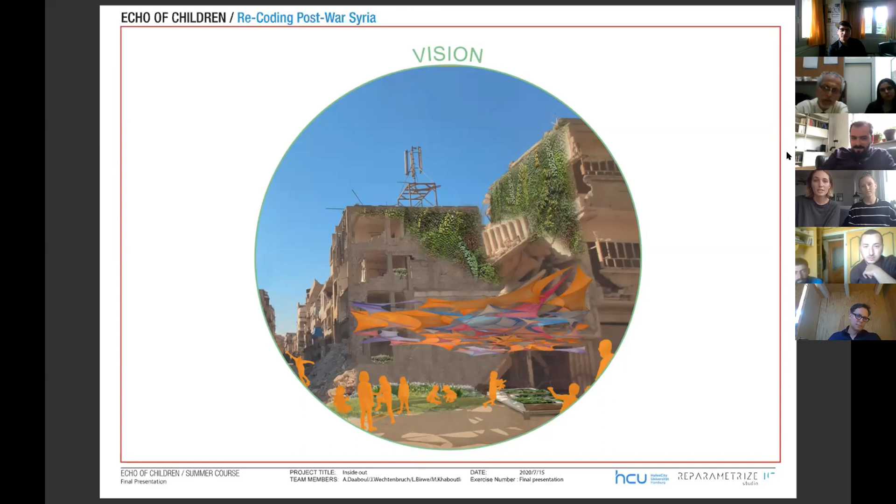To start our presentation, we decided to make a timeline to show our way from our first vision to the final design, and to show which aspects actually impacted our design. Coming to the first vision that we had, we wanted to design workshop areas throughout the city, to have small areas where kids could come to learn or interact with other kids and play. But I'm going to explain that a little bit later.

So the first phase was the research phase, where we spoke about our first idea and vision. After that, we had a case study where we focused on Beirut, and afterwards we analyzed the post-war situation in Damascus. Our idea was to have workshop areas spread through the city and to have a recognizable design, so kids would come there and know that there is an area where they can feel safe and interact with other people, and actually remember these places. We also wanted to design buildings that have a special atmosphere where kids feel safe.

Coming to the case study on Beirut, what was very important was that the city and its inhabitants were quite separated into 2 parts, as you can see at the bottom, the green line. It was called the no man's land, where nobody would actually go. Within the reconstruction phase, they mainly focused on the central business district. But we thought, for us it's important to have small interventions and to use this green space that in Beirut was the no man's land, as a green community space.

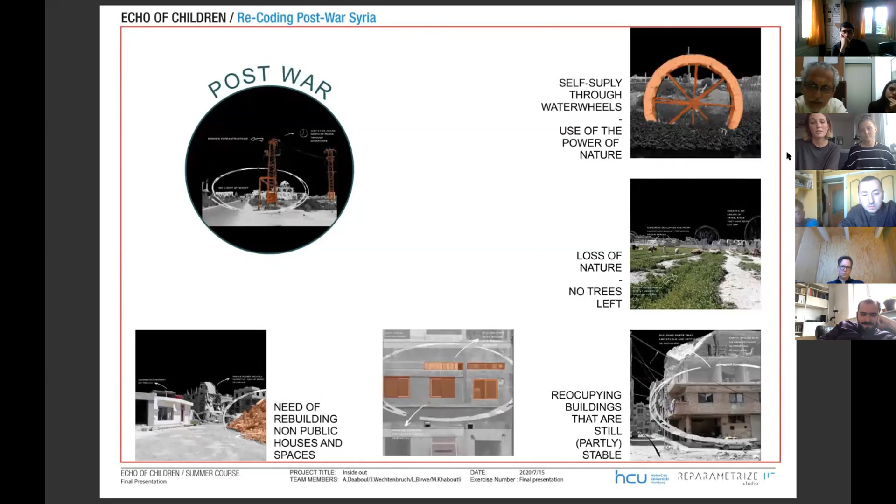So we then thought of clay, as it's a local and easily accessible material, and has a very long and traditional history in Syria. It's a material you don't have to transport much, because you can extract it on site, so you have high cost efficiency. The properties of clay are very interesting, because you have very high thermal insulation and therefore a consistent temperature in the buildings.

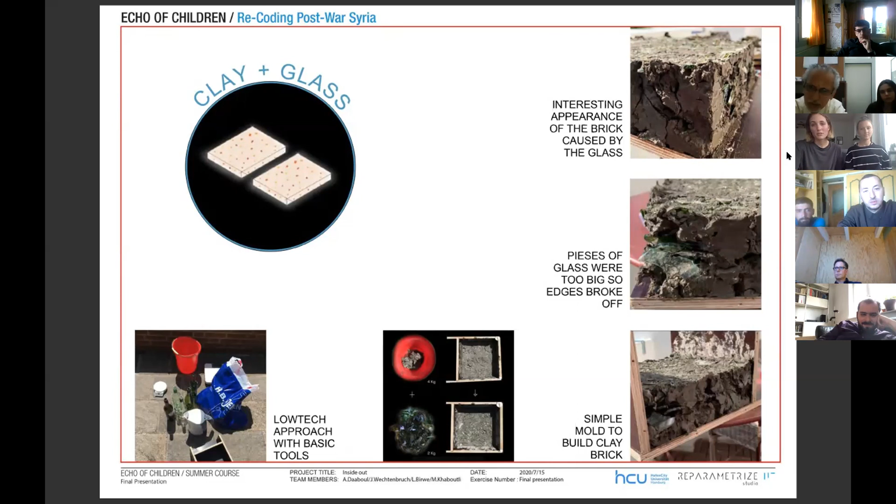Then the next approach was to have a tube of glass in the middle of the brick to get the light through into the building. But unfortunately, the stability of the brick wasn't good enough because the glass took quite a big room, so the brick lost stability.

Which then affected our design later on.

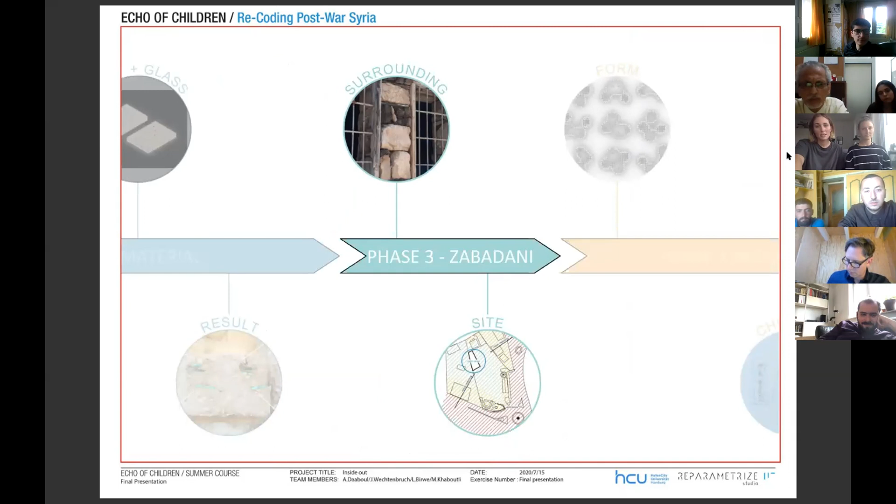In the third phase, we then had a look at Zabadani, the surrounding area and the site, but we're going to explain more about the site later on. What we thought was interesting in the surrounding area was that Zabadani is very close to the mountains, so you have that connection to nature and a lot of nature-like shapes in the surrounding areas.

So we thought, okay, maybe it's an opportunity to get inspired by those shapes. We also got inspired by the huge scale of the stone bricks that people used in the buildings in the surrounding areas.

The last phase was the design phase, where we worked mainly on the form, and we included the kids' drawings that we analyzed.

Working on the form, we wanted to create shapes according to the age and movement of the kids, so we wanted to have a human scale. That's why we decided to make round or organic shapes, and then generated different forms according to different people that would actually use the room.

In the next steps, we started to put these rooms or spaces that we created together, to see how they interact and how we can design or create interesting rooms with them.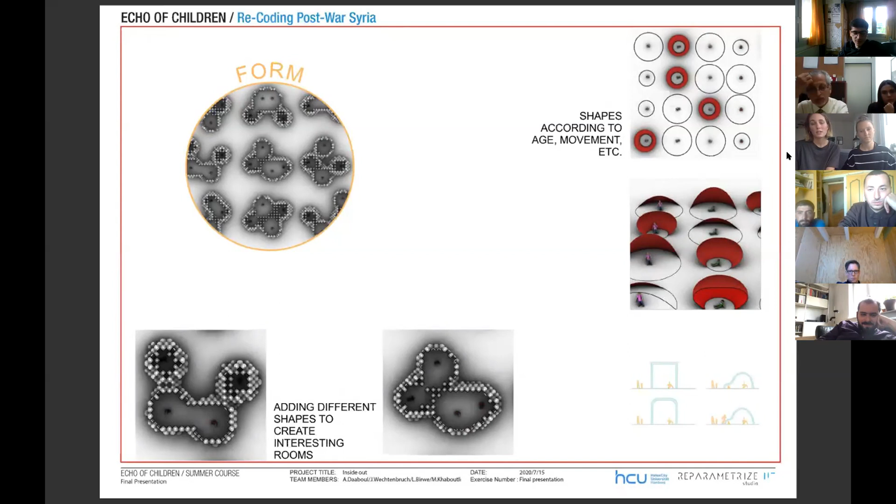In the last step, we included the kids' opinion. So we asked them, what do you think would be interesting to have on the site, or what would you like to have, or what sort of usage would you wish for?

Most of the kids made drawings where they had either a lot of companions, playing with other kids, getting together, resting in a room with other kids, or an outside play space connected with nature.

So we thought we want to create a space for kids where they can have fun and play outside, get together, but also have more relaxed and private areas where they can focus on themselves, and also have the security of nature around them.

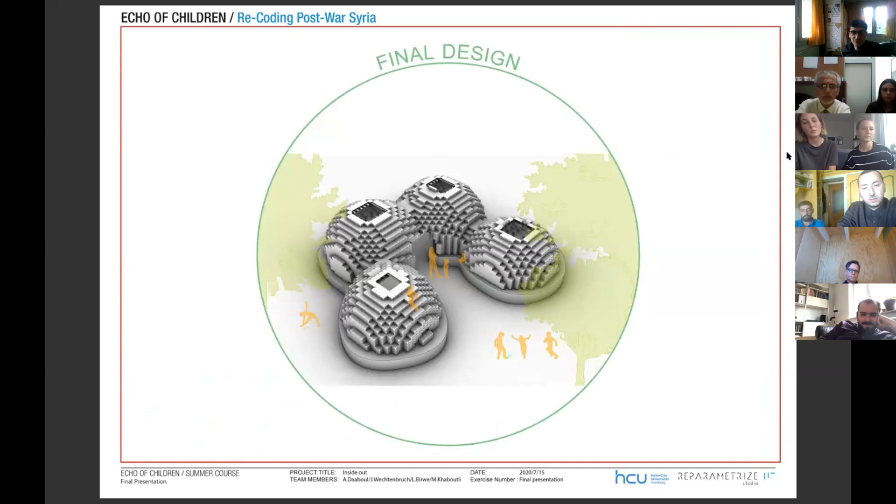So that's a picture of our final idea now, but that's going to be explained furthermore.

Yes, so we were thinking about what has a positive impact on the city in general. And for us, it were strong communities, health and well-being, the local economy, and also nature and sustainability.

When it comes to sustainability, I think we kind of took the right path choosing clay and also the glass, because it's a leftover product, sort of. Also sustainable energy sources, natural cooling, and public green areas would be part of that area.

Then for local economy, we thought about gastronomy, workshops, studios, and cultural events and exhibitions.

For strong communities and health and well-being, we thought of inclusive spaces and accessibility, places that all can enjoy together, opportunities to play, give mental support, include the human scale, and also create a complex environment in general. All these points we wanted to combine in a children's community center.

Yes, our project is called Inside Out, and I don't know, I'll explain that later.

We had three main aspects. One was workshops and studios, because we want a place for children to follow their hobbies and give them support. But we also want a workspace for artists and manufacturers to produce local products, which they could have at a rather low cost if they share the room, depending on time slots with the children.

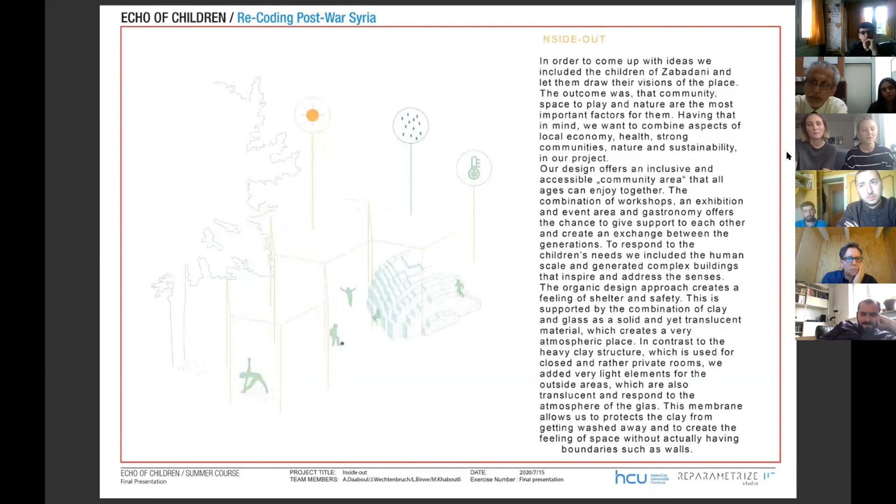Here you can see we put focus on the inside-out relation, because when you're inside the building you have this feeling of space around you, but we wanted to create this feeling outside as well. Panels are an easy way to define space, and they also protect the building from rain and protect the outside from the sun.

That's why it's called inside-out as well, because it's not just about the community itself. The community is the outside, but also each individual person itself is the inside.

As my friend said, we have many points to think about in relating the proposal we're going to work on with the three phases we previously studied. So let's put some parameters to our design or proposal according to these three phases.

The first phase, we took some parameters to put into our design, and also for the second and third phase. Let me start with the unit we're going to use in our proposal, the foundation unit — we start with a regular rectangular shape as the base unit. We have reasons for using glass and clay brick, since it's easy for the local builders to work with and create shapes like the regular rectangular shape.

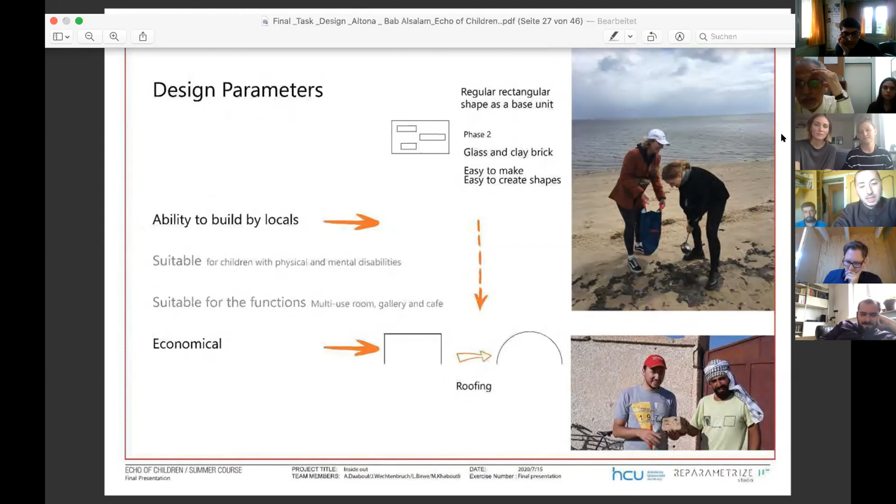And also for the economical aspect — regarding the roofing, we have to solve this economical issue by choosing circular or maybe dome roofing, as we show here.

Our possibilities at the start of the design involved using units we can work with, like the rectangular regular unit, or something like the platonic unit. We study the platonic shapes because of the connection between the faces of each platonic shape with each other, like the dodecahedron or the octahedron. So we started generating forms according to these units, putting some algorithms to make cubic shapes according to the function we need, and also using the platonic shapes to create the same function and proposal.

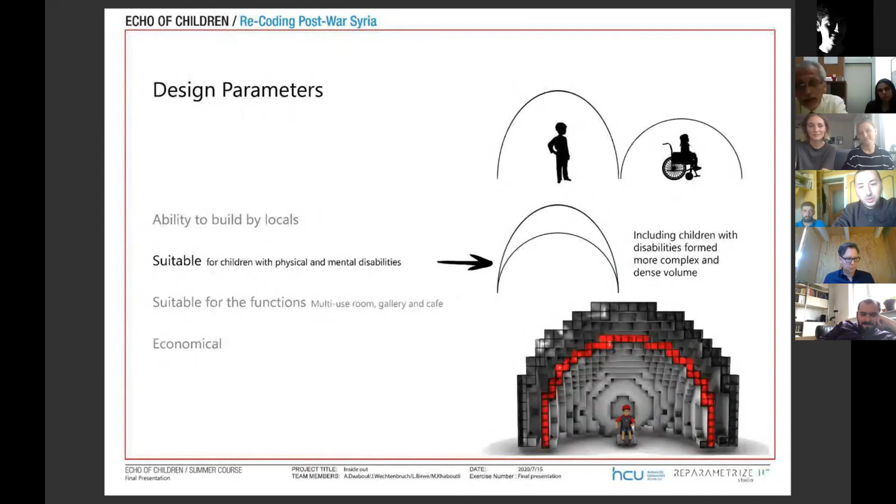Suitable for children with physical and mental disabilities. This point was according to the title of our course, the echo of children. So we chose to work with complexity of shapes because disabled children may need special spaces for their needs, including children with disabilities.

The growing process was according to the module we did on the site, like the hexagonal module. So we can start by building one dome that contains one function, and this dome could grow to contain more functions, or the function we have could also grow.

So the functions we have, thinking about the cafe, the gallery, the multi-use hall, all of these need to be more flexible for growing. We can start with one space for each function, and then grow, or add the space that we need.

The construction technique: we can call this type the voxelizing. The voxelizing worked with two axes, like the XY. So when we thought about the construction of these domes, we had to think about the axes we're going to work on. We tried to split these domes, each space into four slices, and we're going to build this slice by slice to get the form of the dome.

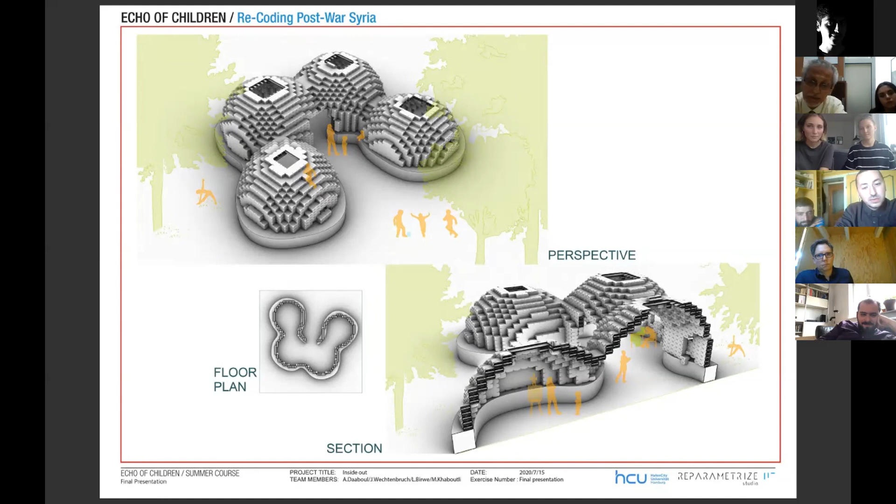We are using here clay with glass, so the glass could give light into the space that we have.

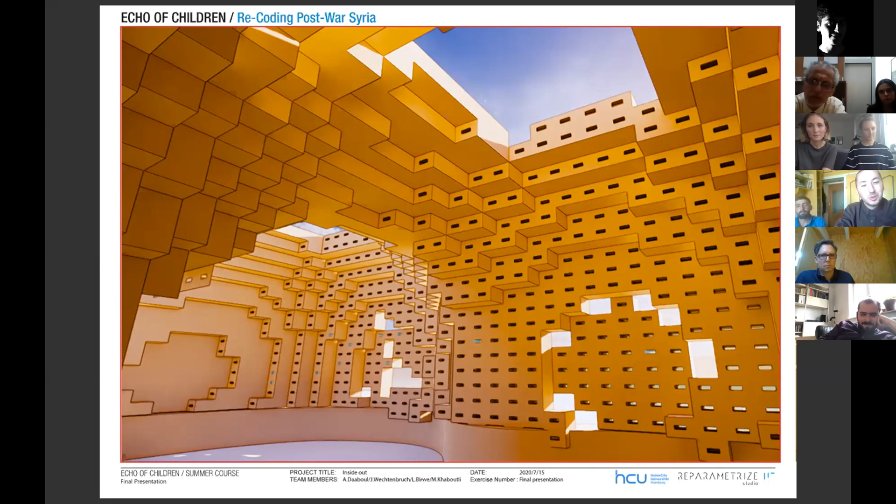We also thought about the interior of this function, like if children were placed inside this form, how this interior would affect them, or how their feelings would be affected by this form or this interior.

You don't have to say something about all of the perspectives, I think we can just go through them because we don't have that much time left anyway.

When we started to talk about making locals involved in designing the project, there was a contradiction between the complexity we reached and the ability of locals to come and build it themselves. Some of the parameters that generated that form might be important, some might not be, but the question is: when we need a complex shape, could it be built by common laborers or not?

So we made some scenarios about how, in case we have a complex shape, common laborers could build it. The first might be reed supports along the slices. Each one has its pros and cons. This takes extra work for reed implementation, but the pros are sustainability and cost efficiency.

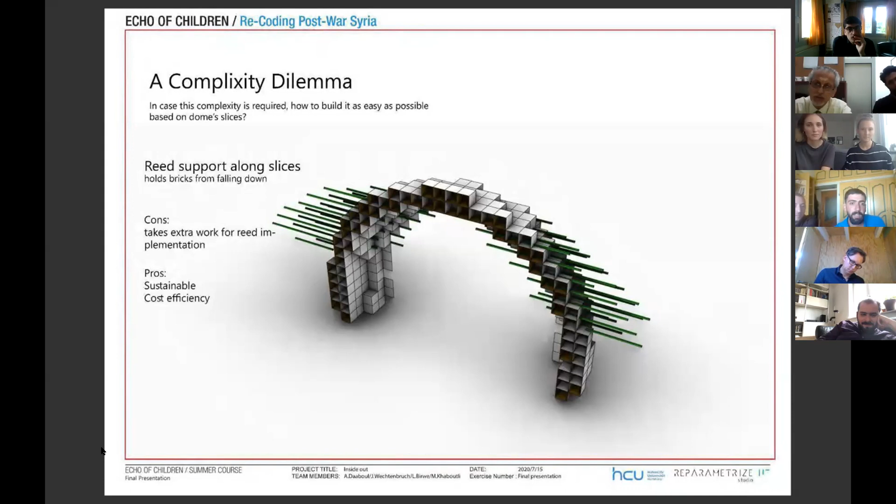The next one, formwork units, made with horizontal and vertical units based on brick dimensions. Its cons: hard to arrange for low and mid-skilled laborers. Its pros: few units could be used for the whole slices, each one dissolved and then implemented on the next slice.

Based on these slices, we can also make a metal form that can hold the bricks together. Its cons: it's too expensive and heavy to carry and implement. Its pros: it's easy to put bricks within without problems.

The last one might be making several molds, but it's a problem, it's hard to arrange for low and mid-skilled laborers, and extra costs for molds might require formwork to make it stable.

So we came back to the same dilemma, like when we have complex shapes, how far we need these parameters that made the complex shape by itself. Do we need this algorithm or not? And the most important question is to what extent we need to make people involved in this construction, especially in this phase. When we need them, maybe we have to get rid of some complexity to make it easier. It's still an open question. We didn't reach the perfect techniques to form this complex structure, but the question itself, how to make a complex structure easier for common use, this is what we were discussing.

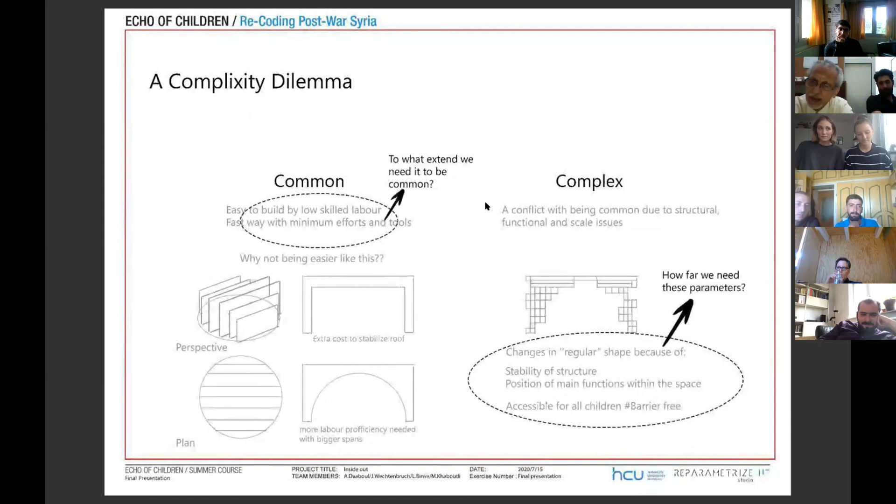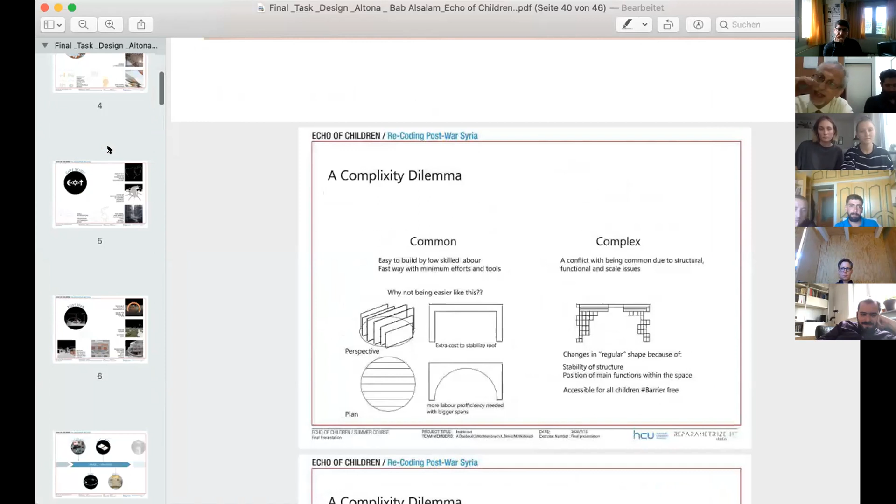The reason I'm saying that is that you took a very basic and simple material. Let me ask you another question. The images which you showed us, where you tried the bottle of glass and then it didn't work out, and then you used another type of glass and it didn't work out, until you reached the idea of having slices of glass in the brick itself. Was that actual experimentation which you've done, or was it theoretical?

No, we did it, well, we didn't come up with the final one, that was actually the work of the other side of the team. But it was a process. Yeah, we all did some work on it and tried to experiment with what we can reach. And first it didn't work, but then with this way, it kind of had this super nice glow from the inside.

I think this is a wonderful job. I think having this simple material and trying different possibilities to, because during the presentation you said we wanted to create our own material, and when you started you were talking about clay and building with clay, forming bricks or forming walls. These are techniques that have been done for a long time, so I didn't feel the creativity in that.

But then when you introduced glass, again, we've seen the combination together. But the exciting thing for me was you actually doing the experimentation and going through the process of discovering what is the right combination between clay and glass that will give you a piece of brick of your own, that gives this very nice feeling, you said, resulting in a special and emotional atmosphere. And I think it can be an emotional atmosphere, the way you are going to be able to combine them later on. But that part of the experimentation was very exciting for me, the actual experimentation of the glass and the clay itself.

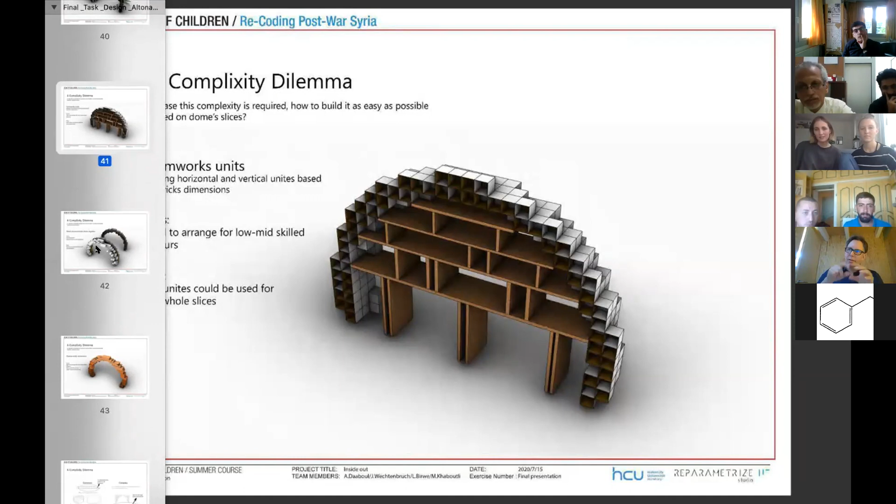Because if you want to build an arched shape, which in the end the vault is kind of a barrel vault, more or less an arch shape, a parabolic shape, then you need a lot of material that follows exactly the right shape. And if two bricks come together just on an edge, this would not work, of course.

You can make it work. Also false vaulting, just putting stones on top of one another, if you give them a lot of additional weight on top, then it works well.

So you would need to make your shell somehow thicker. There would be two ways: either making it thicker to really make the shape work, or thinking why not use these blocks as they are, making the roof lighter, since you also have the tent fabric on top, and the walls have that heaviness.

I know it's your idea of having these caves, of course. So yes, interesting.

Not all the problems are solved yet, and in that respect, especially the last two groups are very different from one another. One group maybe does not have that emotional touch of the material, but is very far in showing how it can really be realized.

And here, we still have a bit more of a vision, a very beautiful vision in terms of a building from mud. But it would be interesting for me to hear from the Syrian side: what do you think? How would people react to such a building, in terms of mud being a material of the past?